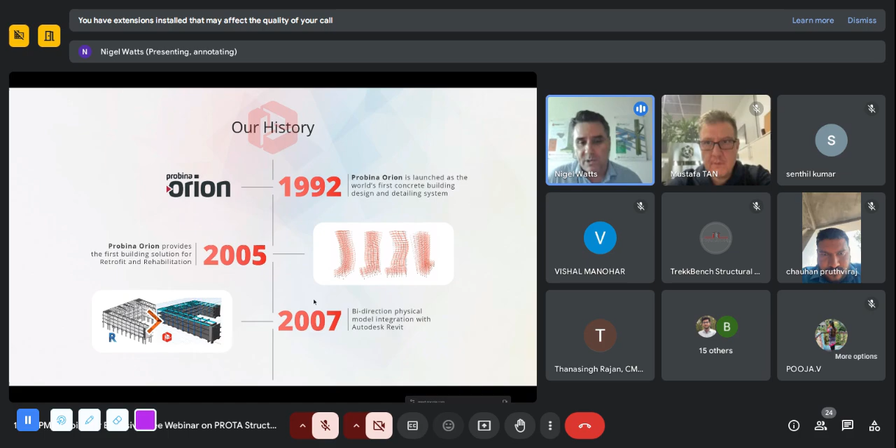We started communicating with Revit, and were one of the first to have true physical bidirectional model exchanges with Revit back in 2007. We've always been trying to innovate and create class-leading technology. In 2014, we introduced ProtaStructure, re-engineering the system to create a true multi-material platform for concrete and steel building design and detailing.

Not to be outdone, Prota's engineering teams have also been involved with some world's firsts. We designed the world's largest airport terminal building in ProtaStructure in 2018 - the new Grand Airport in Istanbul. We're now distributing the software to almost 95 countries around the world, so we're growing very quickly. It's a very exciting time to be with Prota.

We have over 30 years of experience developing the technology. This includes multi-language support, significant numbers of design guides explaining new features - and we've written a lot of design guides to the Indian standards as well. We support a range of international codes: formerly the British standards, the Euro codes, the American standards, and subsets of those - local national annexes for places like Malaysia, Ireland, and Singapore, and places using American codes with subsets, such as Thailand, Indonesia, and the Philippines. More recently, we've also introduced the Indian standards into the software, which is what we're going to focus on in today's presentation.

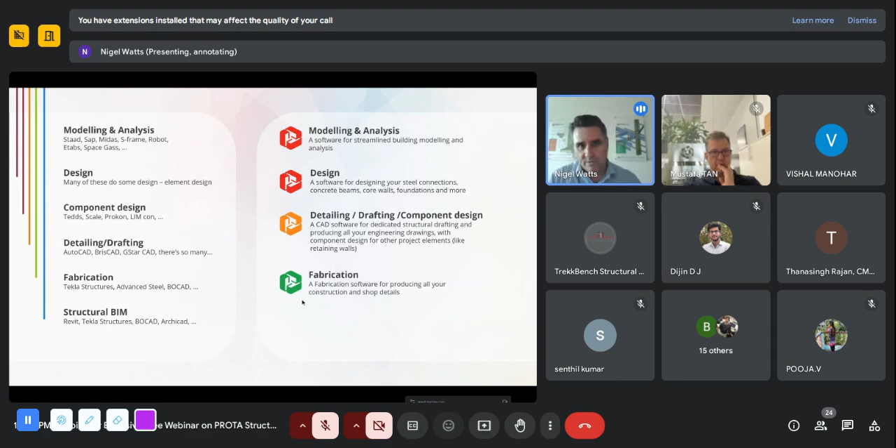You may also wish to go down to fabrication. So maybe you're working on a design build project, or maybe you're working with a contractor and they want that extra level of information to help them facilitate construction. So being able to actually go right down to producing shop detailing, rebar schedules, steelwork detailing, to go right down to the nuts and bolts as required.

And then finally, a tool that allows us to share and communicate with other project team members, whether it's the architect or the owner, to be able to share this information across platforms in a seamless way. So this is the philosophy behind ProtaStructure. It's just one system, streamlined for building design and detailing, and combines a few subcomponents.

So we have ProtaStructure, which is the main modeling, design, analysis, and documentation part of the software. That's complemented with ProtaDetails, which allows us to create all of our reinforced concrete detailing and general arrangement drawings. We have ProtaSteel, which can work with the steelwork and look at the connection design and detailing down to steelwork fabrication. And finally, we have ProtaBIM, which is really a collection of interfaces that allow us to share and communicate the models with other programs out there.

You might want to send a model out to, say, ETABS. Perhaps you want to communicate through Revit and bidirectionally link with Revit. Perhaps you'd like to create all your documentation. So there's a collection of tools in there that allow that to take place.

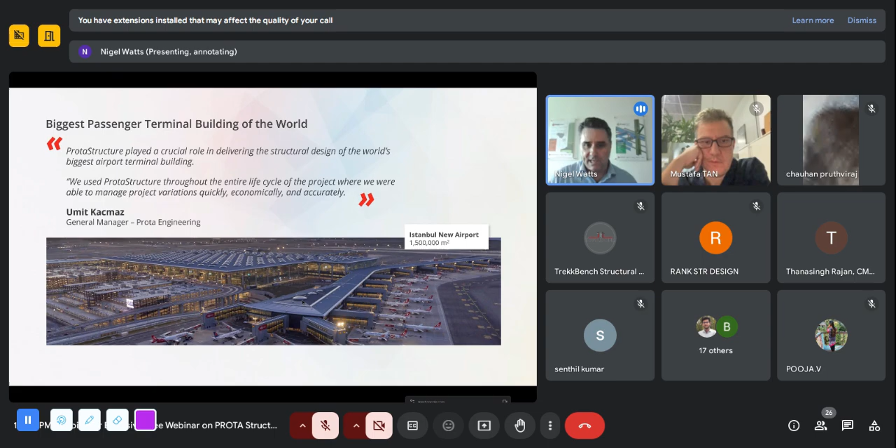Now, the software is being used all over the world. We've got some really amazing projects that we see our clients getting involved with, a range of different interesting projects, from airports to large commercial infrastructural projects, educational, healthcare, multi-story mixed-use developments, hospitals, buildings all over the world, concrete, steelwork. It really is an interesting mix of structures that we see, seismic focused buildings, airport structures, even down into industrial structures, steelwork, stadiums, overpasses and the like.

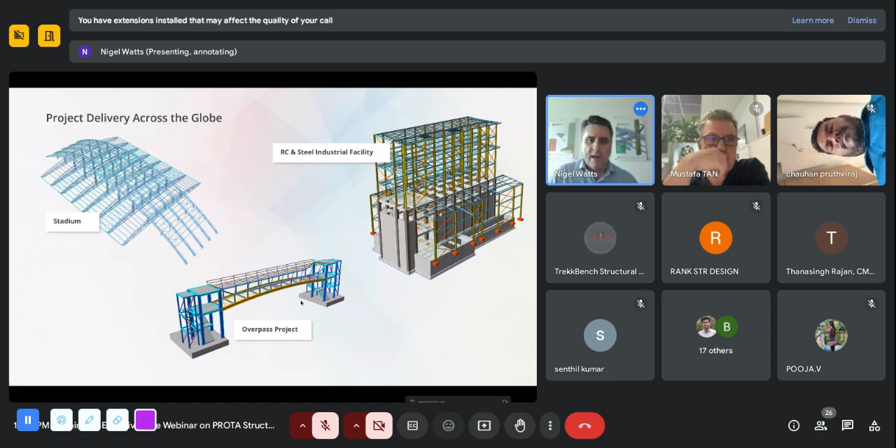The whole system is really driven around productivity. We're trying to streamline processes and make you significantly more productive in the way that you deliver your projects. Time and again, we're seeing across the world that we're able to save engineers significant time in how they go about delivering their projects.

So at this point, I wanted to draw in Mustafa Tan, product manager for ProtaStructure, to talk a little bit about the implementation of the software to the Indian codes. Are you there, Mustafa? Yes, I'm here, it's a great pleasure to speak here today. I hope everyone is okay too. So I'm Mustafa Tan, product manager at ProtaSoftware.

We've done a lot of work over the last year or so implementing the Indian codes. It's quite a comprehensive implementation - we've covered a lot of ground, almost from A to Z. Because of the nature of ProtaStructure, we have a lot to implement, because we are not stopping at analysis or modeling. We have to automate the load combinations, calculate the base shear, and continue with design and detailing - there are a lot of details to the Indian code, so we have to take care of all of them. It was very intensive work, but finally we managed to put all the stuff in ProtaStructure.

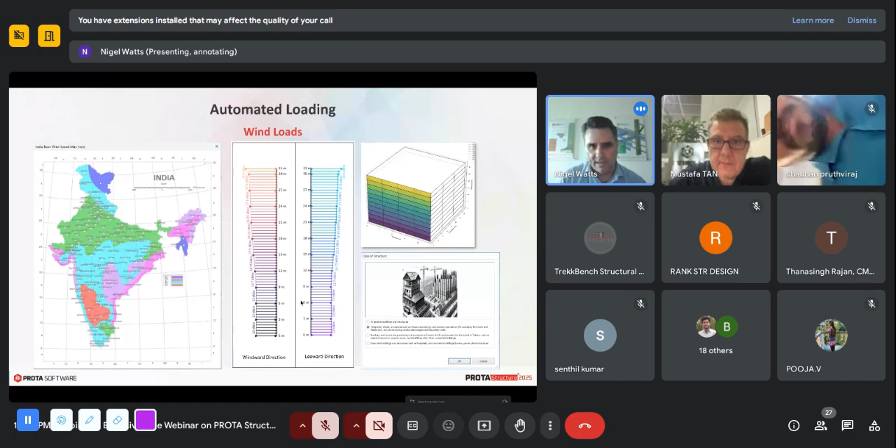Seismic's obviously very important, especially in parts of India. It dominates the design. We've done a lot of work in this area, haven't we? Yes, to admit, seismic analysis and design is one of the strengths of ProtaStructure. We have implemented features that I can say confidently don't exist in any other software. You cannot find the automations that we provide in any other software.

So we have a comprehensive user interface, first of all, for calculating the acceleration spectra. The starting point is the spectrum, and you can automatically create the spectrum using the parameters outlined in IS 1893. For example, all you have to do is select a town in India, the related seismic zone, and other factors will be fetched automatically from the code.

And we provide you the helper tables also that are in the code, and we provide you with relevant references, so you are not lost in the code, and you are able to track what we are doing. Also you can select different structural systems in each orthogonal direction.

You can also select different structural systems in each orthogonal direction, and you can use different behavior factors. And of course, you can use different design spectra in different directions.

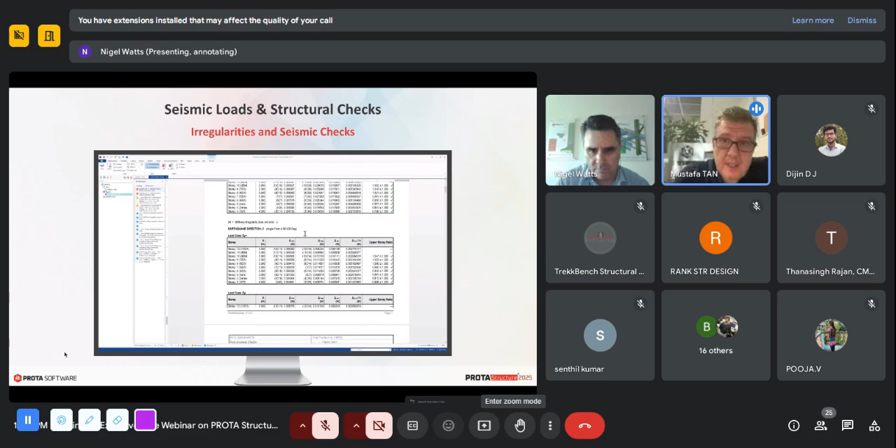So in addition, we also do a lot of underlying checks. Post-analysis checks, there's lots of checks that we're performing, isn't that right? Yeah, you're right, because seismic analysis is not complete unless you perform irregularity checks and other seismic checks. These are very important. You cannot just stop at calculating the base shear. The post-analysis report you see here includes all the important checks related to IS 1893, again with code clause references.

For example, we perform a drift-based story check. We perform vertical mass distribution checks, torsional irregularity checks, and once we detect a torsional irregularity, for example, we automatically repeat the analysis and apply the penalties. We also check whether the equivalent static method is applicable or not in the project.

Yep, and as you say, because it's an iterative process, a lot of the penalties are automatically applied, right? So that just takes a lot of the pain away from having to do that manually, isn't it? Yes, in a typical software, once you calculate the base shear, you have to do all the irregularity checks by yourself, and these can be really rigorous and time-consuming.

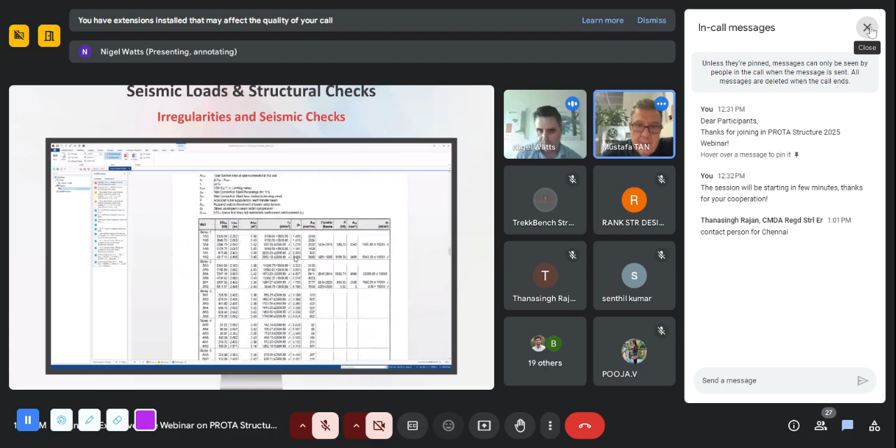I can say that. Also, there are some details about the base shear calculation and the modeling approach you use when calculating the base shear. For example, diaphragms, rigid diaphragms or flexible diaphragms, how you distribute mass. So there are details also on top of that. And this all comes together not just in terms of the analysis, but also the design, right?

After we do the building checks, we go member by member and design the reinforcements, for example, for the beams under the envelope actions of all seismic loads. But again, seismic design will not allow us to use the analysis results directly.

For example, if you are designing a ductile beam, you have to use the capacity shear, and all the minimum ratios, maximum ratios, or constructive rules are changing, overridden by the seismic codes. You cannot just go with the design code.

You have to comply with the seismic code. So all the design rules outlined in the Indian seismic code are applied for the beams, also for the columns, as we'll see in the next slides. Obviously parts of India may be low seismic zones, and you may not be designing for ductile detailing, or maybe it's just typical elastic gravity-based design.

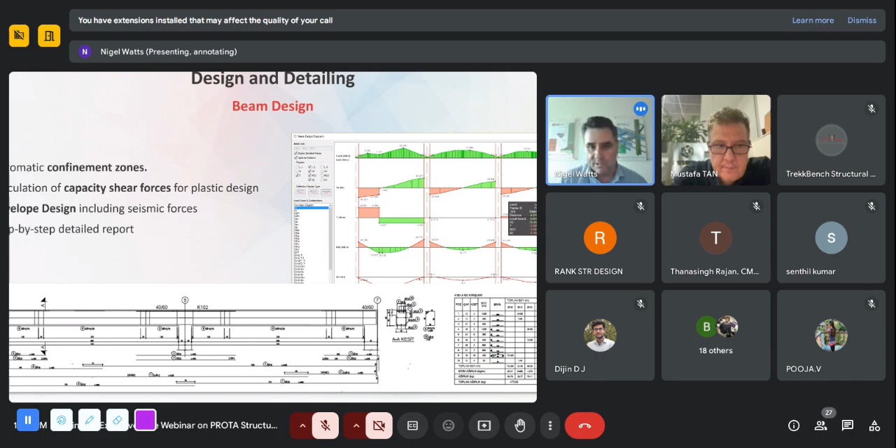So that's no problem at all. But what we're doing here with seismic goes above and beyond what you would do for typical gravity-based structures. And this also complies with the reporting, right? You can see this not just with the design, but right through into the detailed reports. Yes, because transparency and transparent design documentation is priority number one for us.

We have been investing in it for a very long time, spending a lot of time on it. So when you design a member in ProtaStructure, it can be a seismic design or a gravity design. When you get the design report, you will have all the step-by-step calculations with code references and clauses outlined, so you will be able to verify, double check, or track the calculations in ProtaStructure with confidence.

And this is not just for the beams, but also the columns. Obviously, columns and walls are important elements, and they're treated in a very rigorous way, aren't they? Yes. First of all, for the columns, we perform a biaxial design.

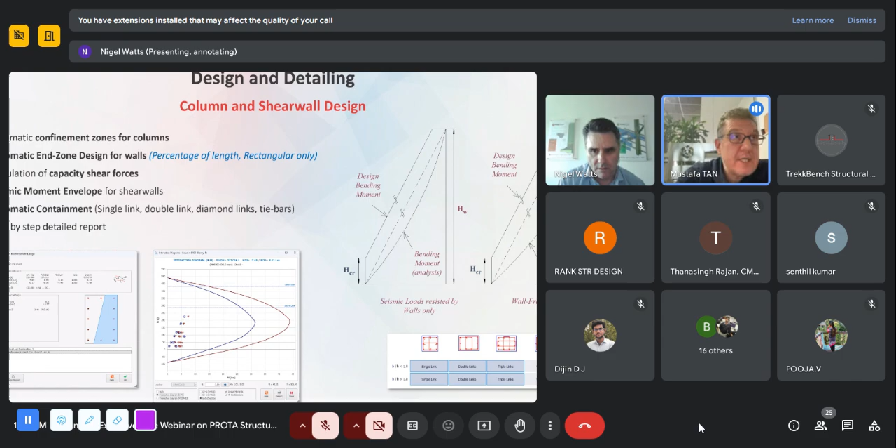Whether it is a seismic design or not, it doesn't matter, we perform a biaxial design. But when it comes to ductile design, what we do is apply the reinforcement ratios and constructive rules for the columns that are outlined in the seismic code.

For the walls especially, we have to consider the end zones. These are automatically considered in ProtaStructure, and also the confinement plastic zones - each code has different terminology for it, you can call it confinement zone, plastic hinge zone, or protected zone for columns and for beams. These are all calculated automatically, and the amount of links are provided accordingly.

And for the walls, especially within the critical height or outside the critical height, we can adjust the end zone lengths, and we can calculate the shear force or bending moment envelope for the ductile wall design.

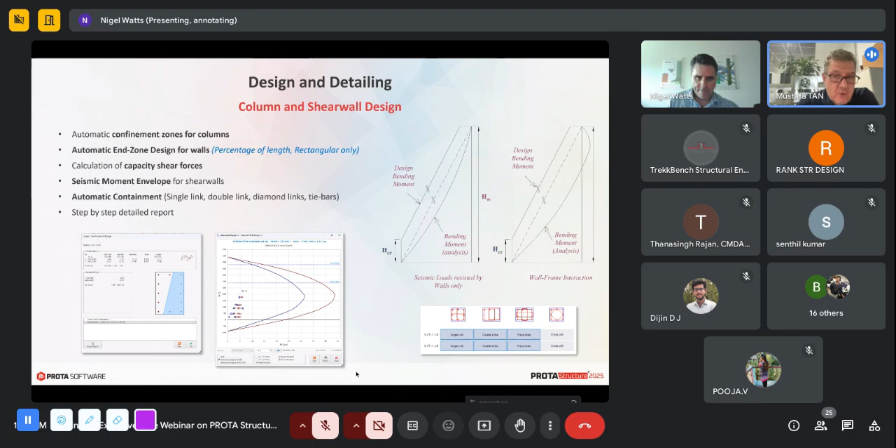And also one important thing, the section design of columns. For the section design, you have to provide proper confinement of the concrete core. So you can use a single link with tie bars, or you can use double links, diamond links, triple links, depending on the confinement requirements. These are all automated in the software.

Obviously, the documentation is key around this as well, and there's detailed documentation covering the seismic requirements also. Yes, especially the shear design needs some elaboration in the reports, because as I said, we have capacity shears calculated, contribution from concrete under specific conditions, and so on. There are some details on that, and we put that in the report step by step also.

So as I mentioned, the reporting is important, and we've provided detailed step-by-step calculations. That applies for the majority of the design, doesn't it? So it's not just the concrete work, it's also the steel work and other parts of the system. Yes, because we support IS 800, the Indian steel code.

So you can, of course, design the steel members, and at the end of the design, we provide step-by-step detailed reports. The step-by-step reports are the de facto standard in ProtaStructure. For each member, you get a detailed report.

Of course, you don't need to print all these out, right? These can be summarized - there are summary reports, and you can selectively choose if you want to provide comprehensive documentation for some critical members. Yeah, of course, it can be thousands of pages if you attempt to print out all the detailed reports, so for that purpose, we also provide summary reports.

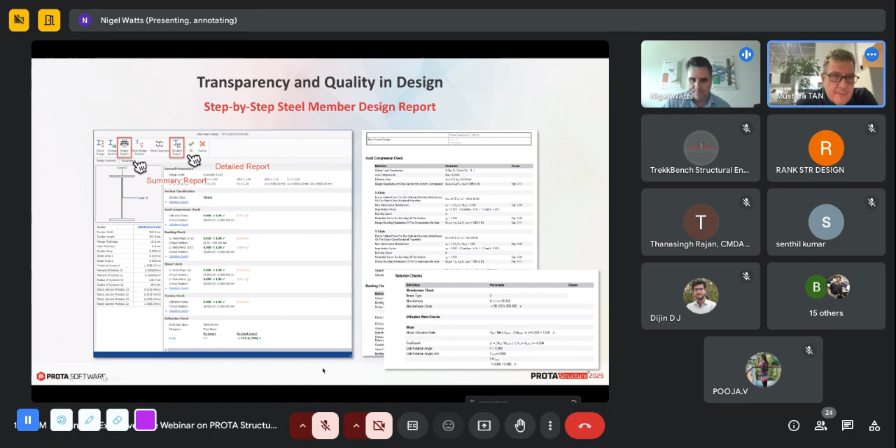We've been expanding the capability of ProtaStructure, and so we now have a composite design. Just for the Indian users, we're aware that you do design this to Eurocode, and this is going to be available in the next update. You'll be able to select a composite design as well. This is just one of those aspects where we're continually expanding the scope of the design systems that we are incorporating into ProtaStructure.

Yes, in fact, the composite design in ProtaStructure is quite powerful. I don't want to start talking about it in detail because it will take an hour maybe, because there are a lot of details like composite action or stud calculation, whether it is uniform or segmented layout, vibration checks, etc. So there are a lot of details in it, but you can benefit from the composite design in ProtaStructure, of course.

And the key, I think the real key with what we do is we automate the drawing production. It's all about streamlining design and detailing processes, and this carries through to the Indian standards as well.

Yes, especially in ProtaDetails, with one click, you can create all the structural details. Once you finish your design in ProtaStructure, you can just create all the details with one click in ProtaDetails.

And that detail drawing includes all the seismic provisions. So, for example, lap splices in the middle or at the supports for the columns. All the plastic hinge zones are confined with links, and span regions are maybe confined with different link spacing.

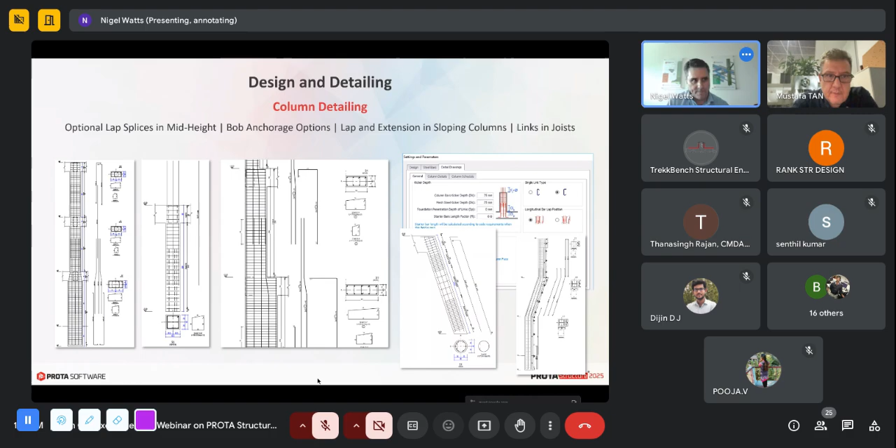Definitely. So that extends all throughout, right, even down to core wall detailing. And there's different options for this as well.

Yes, shear walls are especially important because they help us reduce the lateral displacements, and they provide strength to the structure, of course. But if you do not detail them correctly, you can have serious damages in the building. And for that purpose, especially in Turkey, we experienced a lot of damages for the walls that are not detailed properly.

So for that purpose, we have comprehensive options for how the web bars will go into the end zones, how the links in the end zones will be detailed, and how the boundary elements or the end zones will be detailed, what will be the lengths, etc. So we have put all that know-how and all that experience in ProtaStructure.

So again, with one click, you will get all the seismic details of shear walls there. It can be a narrowing wall, it can be a basement wall at the bottom and an earthquake wall through the top stories. It doesn't matter, you will have the details.

And there's some real smart tools now in terms of driving the detailing process, especially with things like automated containment. Yes, rectangular walls we do, and also core walls are an important part of, especially the high-rise structures. So core walls are no exception to seismic detailing, so you have to detail them also against seismic forces.

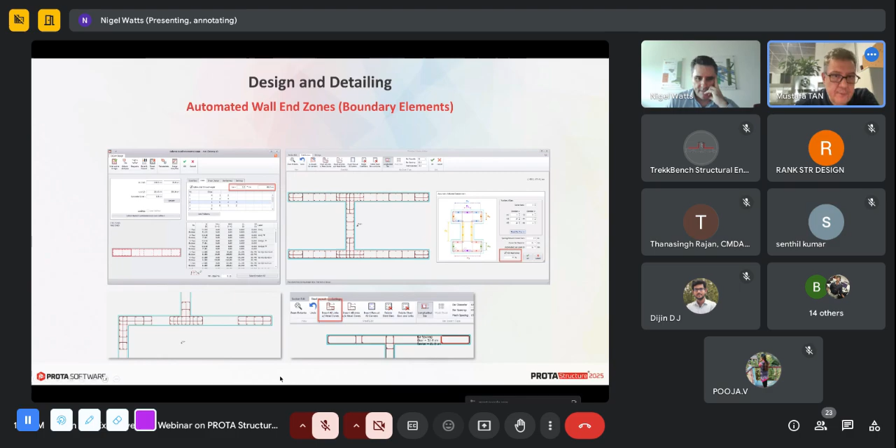And also we have an interactive wall editor that you can use to, for example, put the bars automatically with end zones and web bars, and you can even fine-tune the reinforcement. You can insert additional links, additional tie bars, you can change the diameters and make it ready for the design check and detailing. Yeah, it's very customizable, it's a great new feature that's been introduced recently.

Obviously the seismic design process is a theme here today. In the north of India, this is something you need to look at carefully. Other parts of India, perhaps not so much, but there are a lot of details behind the checks we do. Things like strong column and joint shear checks are important, and they're automated, especially these two checks if you are designing a ductile building.

These two checks have to be done after the design, once you know the reinforcement inside the column and inside the beam. They have the potential to roll you back to square one, because if they are not satisfied, you may need to change your reinforcement, change your design, change your sections, or even change your structural system. So they are very important and very hard to do by hand.

So these are all automated. You can check it during the design or after the design, and ProtaStructure will give you warnings at every step of the way, so you can fine tune your projects by looking at these checks.

It's not just RC, there are other capabilities in the software we're simply not going to get to today. The BIM integration we have is very powerful, and we're able to interface with a wide range of different systems, because our philosophy while developing the software is to always think BIM first. We always try to think whether what we do is compatible with BIM practices and BIM data structures.

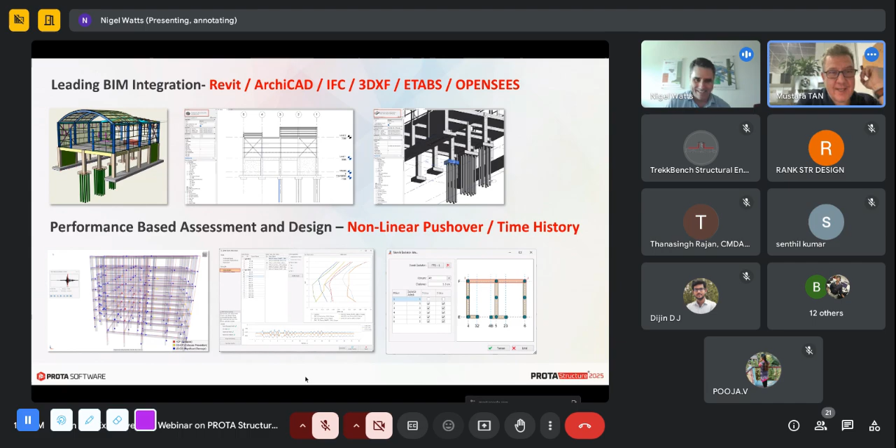This would take maybe two hours to talk about, but in a nutshell we have all these features. And then it extends into steel design and detailing, right down to foundations. Foundations, of course, is an important part in ProtaStructure. We do pad footing, pile caps, raft foundations with finite elements or analytical methods.

We also send the model to ProtaSteel. Once we finish the design in ProtaStructure, we communicate the model to ProtaSteel with internal forces and all the physical properties, then we can do component and connection design in ProtaSteel. We have a very powerful tool, IntelliConnect, to design connections with a single click - hundreds of connections in a very automated and smart way. Connection design is an important part in ProtaStructure as well.

We're just really touching on it a little bit. We can't really do the system justice in the short time we have today to speak to everybody. But that was really great, Mustafa, thanks very much for giving us that insight. The pleasure is mine, thank you so much for giving me the chance.

So thanks very much, Mustafa. Look, we're going to - I'm now at this point just going to come out of our presentation, and I'm going to actually move into the software. So if you just give me a minute, I'll just minimize my screen here.

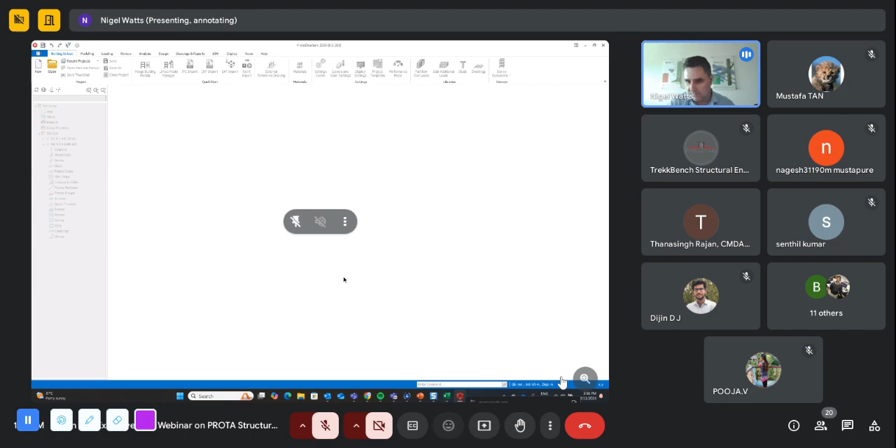I'm just going to do a quick demonstration of the software and show you how what we've just discussed comes together. So I'm going to create a new project, and we can call this India 2025. Here you can choose the templates that Mustafa was talking about earlier. If you were doing projects outside of India, you can draw upon other templates, but here I'm going to choose the Indian template. When we select this, it will load the Indian codes of practice, so all the localized design and detailing preferences will be loaded into a template, and it will set this up for us to start the modeling process.

There are different ways this can work depending on the information you have. Mustafa was talking about the fact that you can import information into here. A common way of working is that people maybe just have a 2D architectural plan. You can import this into the plan view and use it as a ghost layer to model on top of. You can extrude or extract grid lines, columns, and walls from those drawings if they have that relevant information, and build the models quickly.

The general environment here, you'll see across the left there's a tree, and along the top we've got it in a very simple ribbon format. So starting the project is here. You can then create your modeling, your loading, assign your wind and seismic load. You can create your modeling with steel and concrete, then assign loads, whether it's seismic or wind loading. You can check things before you get into the analysis and then the design. Finally, you can produce or create all your drawings, whether it's concrete detailing or steelwork detailing with ProtaDetails and Proto Steel. And if you wish to communicate with other platforms, you can. We've laid this out logically so it's easy to understand how this is all set out.

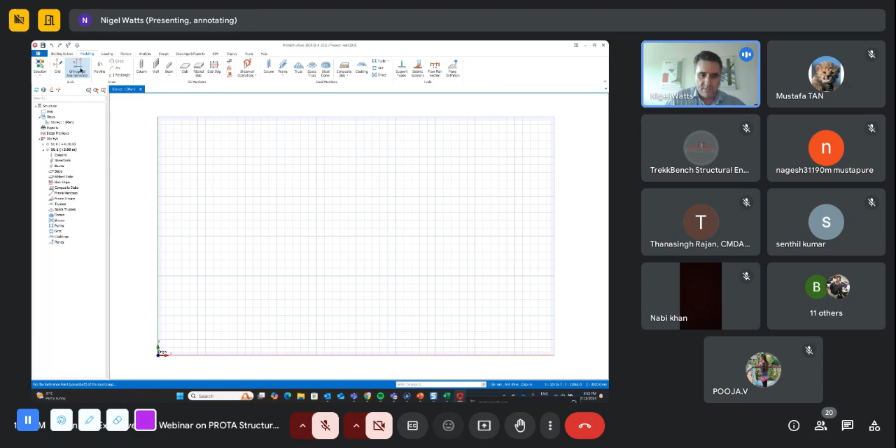What I'm going to do today is just create a simple model, and I'm going to build it from scratch because I want to show you the essence of how the system works and how efficient and quick it can be to create a model.

Here I'm just keying in some grid lines. Everything I'm doing in here is live, so you're seeing it in real time. I've created a grid line arrangement here. These are dynamic, so you can work with the axes and make changes.

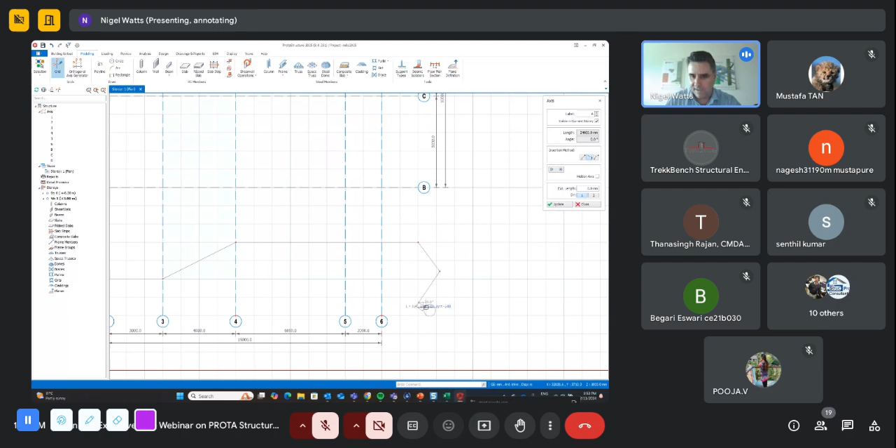If you want to perhaps put in a grid line that's not exactly straight, maybe you've got a curved facade of the building, you could define this. You can type in a chord length to set this out. If you have grid lines which are a little bit irregular, and we often see unusual buildings or facades that some of our clients are working on, you can just come in and use the grid lines to help drive the set out. This can be whatever funny arrangement the architect may have dreamed up. So you can create your grid lines here to set out the basic structure.

Now I'm going to work with physical objects to create the model. The first thing I'm going to do is create some columns. I can create a column by clicking and inserting it, or if I have multiple columns, I can box around to create them. The columns can be orientated in different directions and different ways.

If I would like to place a load of columns along the curvature of that grid - let me just do that again, I've gone wrong. If I want to create the columns along the curvature of the grid, let me just do this again. I just missed clicking the axes there too, so I can come in and create that, and you can see that they've all been set out along that curve.

Now we have libraries of standard objects within ProtaStructure, whether you're working with concrete or steel elements. This covers all the different steel sections in the Indian code, typical steel sections, built-up sections, cold form sections, as well as composite sections where steel is encased in concrete. You can just choose from the library here of the section you want to work with.

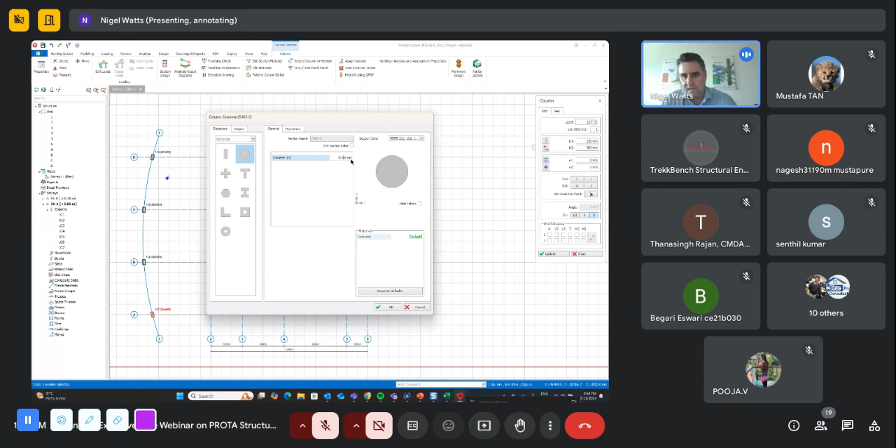I'm going to create say a 500 diameter circular column. The engineering properties will be automatically calculated, and we can use this in the model. So I can come in and define that column, grab that property, and create another column here, and set that up. So we might have a few columns as I've indicated.

You can also use things like grid lines to help with sketching items in the model. So if I wanted to use these to help define maybe the lip on a core wall, for example, I could come in and use these kind of sketch lines to help with that.

I may want to now create a wall, so I'm going to put in a wall here. It's looking at the dimensions, so it's asking you, with the Indian code, is that too short? Did you actually want a wall there? There's a reason why I've done this, which I'll get to in a minute. But let's just come and create this wall.

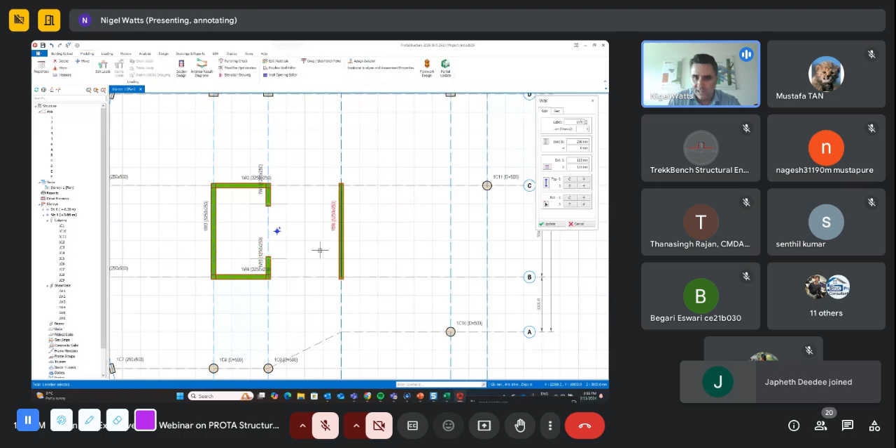I'm going to put another wall in here. I'm then going to come and create some beams.

I can feed in the properties of the beam that I want to work with, and then to create the beam I can box around to put these in, like I am doing here, or I can just snap to point to put the beams in. It knows there's two spans, it's automatically created that. It's cranked that beam along the grid line, or I can just go directly.

As I'm going, if I wanted to create, say, a curved member, I can just come and create this very quickly. If you have lots of members in an area, so if I wanted to create multiple beams in this area here, it will create those. I can just box around to set those out.

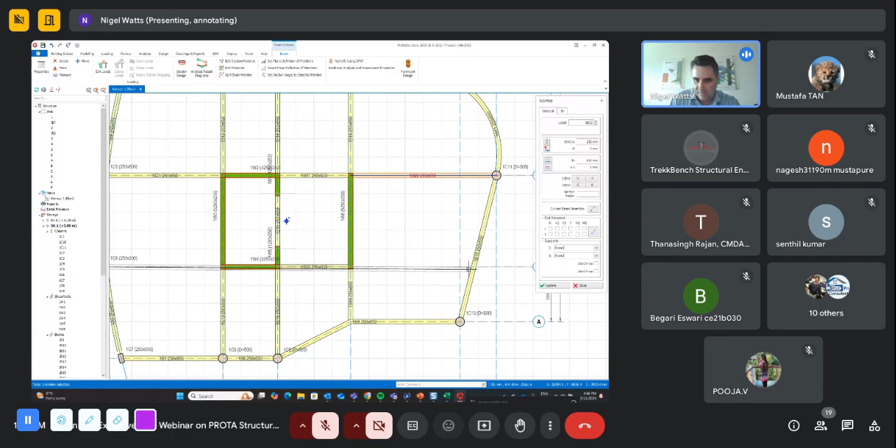It understands that this wall and this beam already exist. So if I wanted to create an extra couple of beams there, I can just draw them through. I don't have to worry about overlapping. All these types of things are just taken care of by the software because we're working with a physical model.

Secondary beams, you can snap to handy points, quarter point, third point, mid-span, and you can just come and create these quickly, driving them in this way. If you have a particular distance, while mousing over, you can hit F2 and type the exact distance in, and it'll pick that point up. It also picks up handy points like the perpendicular, and then you can create that member there.

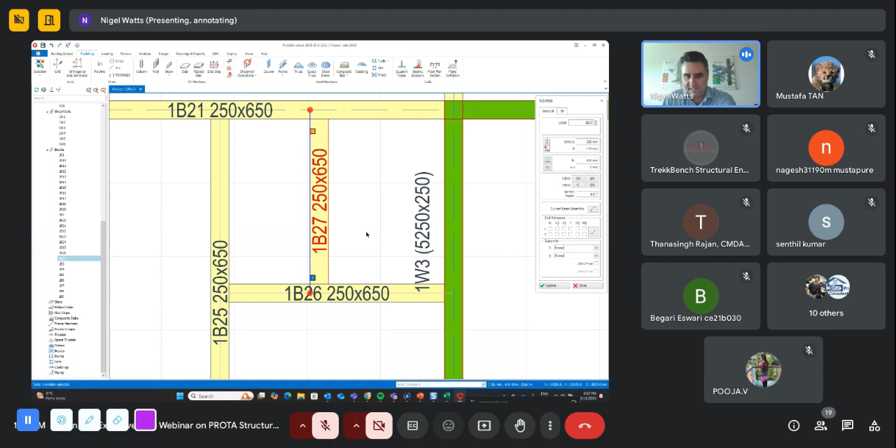Now you can move these around. I can just turn that message off. I can adjust these to suit the architecture, so if you didn't quite get the positioning right, you can just adapt that to suit. Hopefully here you're starting to see that this is starting to look a bit like a key plan, and this is all intentional. You can see the labeling and so on has been done, and that's flexible - you can change this if you wish.

At this point in time, I'm going to create the slabs, but as part of this process, it's going to ask me to generate the combinations. So this is what we were talking about earlier, where we can set up our vertical load combinations, and this includes my dead and live load cases together with pattern load variations.

We can look at stage construction analysis. You can assign thermal loads here. You can also generate lateral cases, so I'm going to use response spectra. You could include vertical seismic if you wish, or you can turn this off - it's entirely up to you.

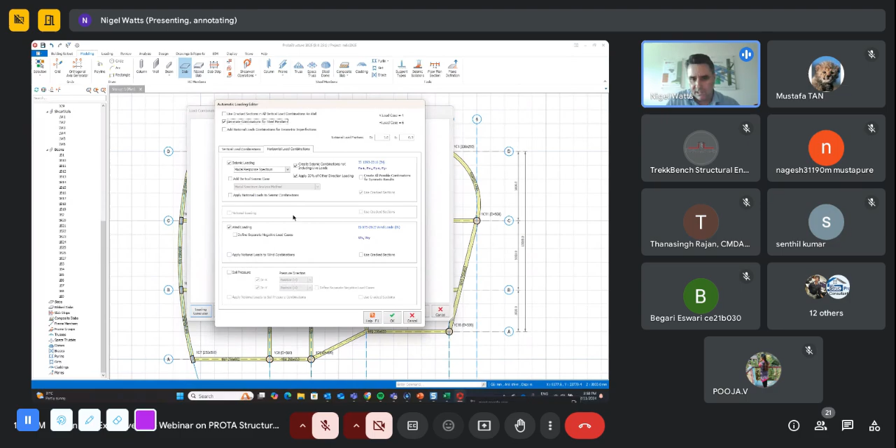You can also create wind combinations automatically in accordance with the code. If you wanted to set up soil pressure and the like, you can do this. You can generate separate combinations for steel, and these can be automatically created here, along with other permutations you can set up in the software. So if I hit OK, with one click it will automatically generate all these combinations, and you can see them here for the steel and the concrete.

You can manipulate the combinations, so if you want to take combinations out or reduce or remove combinations, you can do that as well. So if I hit OK, that's set up.

Then I can come in and create the slab, so I can key the thickness in there. You can assign dead and live loads into this, and I can just update that. So you can see here that we've created that, and I can just run around, maybe I've got those loadings here and here, and maybe over in here and here, maybe it's a bedroom or something like that. These ones you can manipulate, so you can type whatever load you like, and you can also have libraries of finishes that you can draw the loading from.

You can vary the live load, type it in, and just come around the building and create. Hopefully what you see as I'm doing this is that we are automating things like the distribution of the loading, so you can see the live load and the yield lines being created as I go. You can manipulate this to suit, and I can just run around and adapt this accordingly. Maybe this is one, for example. You'll see here that we've automatically worked out the yield line, and you can distribute in this manner.

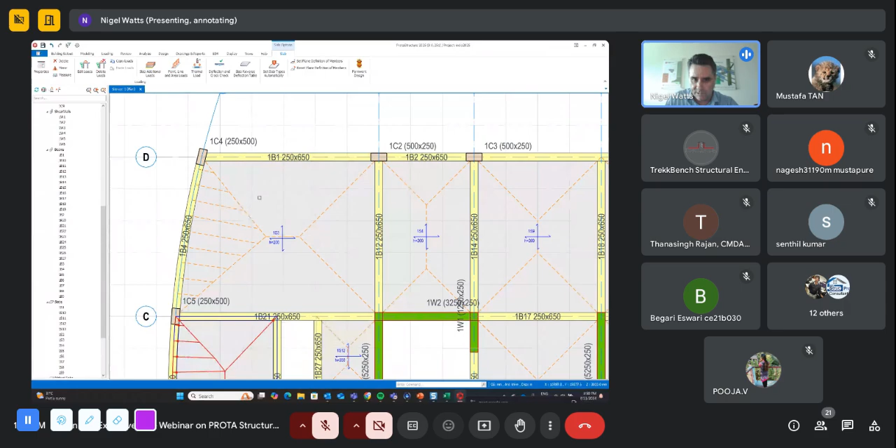You can also use finite element to distribute loads to members. So if I just click on this member, you can see that even at this point, instantly we've already distributed the load to the frame member. And this is very, very efficient. It's very economical, and this is driving efficiency in the building.

Now I may want to add extra loads to this. You can have libraries of things like brick walls, and you can set these up. So I could have maybe a 140 block wall. I want to key the height of this wall in, and then I can just click on this and assign that to the member, and that's just set up. So straight away that brick wall's been created, and we can see that on the member there.

Now any of these loads, you can take them and copy. So I can copy the brick wall loading there, for example, and choose other members that I would like to copy that to. So we can copy this, and I can choose - you can select members, like I'm doing here, you can run around and just select, or you can box around to choose members, and then you can just copy and paste. So it's just an easy process here.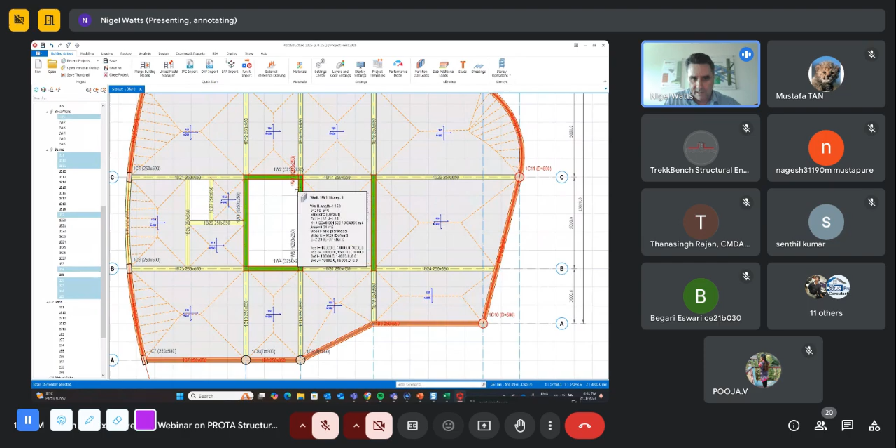Now we were talking earlier about core walls and so on. You'll notice at this point that I've actually created these walls here, and when I originally set them up, I set them up as individual panels. But what I want to do is just select these walls, and I'll just grab that last one there as well, and I'm going to actually take this wall and merge it. So this is now one singular core wall.

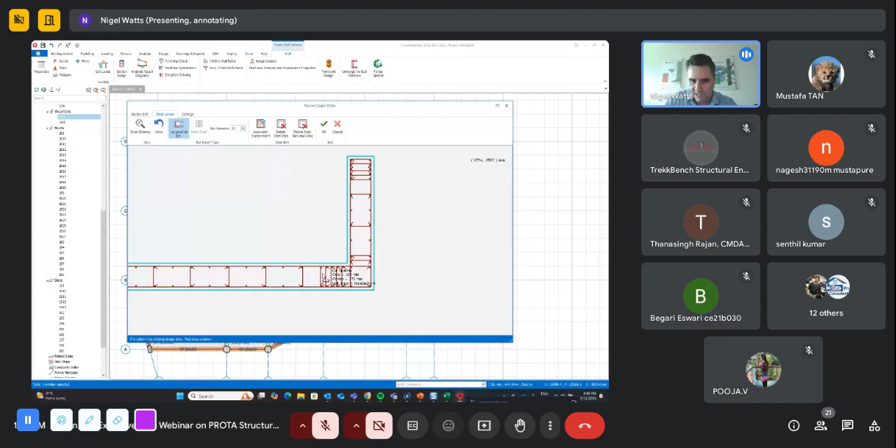Mustafa was talking earlier about us having capabilities to be able to do some smart things like automate the reinforcement of these walls. So I'm going to do that. I'm going to add in - you can choose the percentage of end zones that you want - and then with a click of the button we can prescribe an arrangement here. Now this isn't final, during the design process we will refine this and select the bars, but with things like reinforcement around the corners, creating the end zones here, this whole process is being automated as part of how we've established this. So if I'm happy with this, I can accept that, and then that gets set up in the model there.

I've been working in 2D at this point, but what we've actually been doing is creating a 3D physical model. You can see the 3D model here, it's a physical model, and I can work with this and manipulate it. So you can look at different views, you can tile these in the model, and you can continue to work in both 2D and 3D.

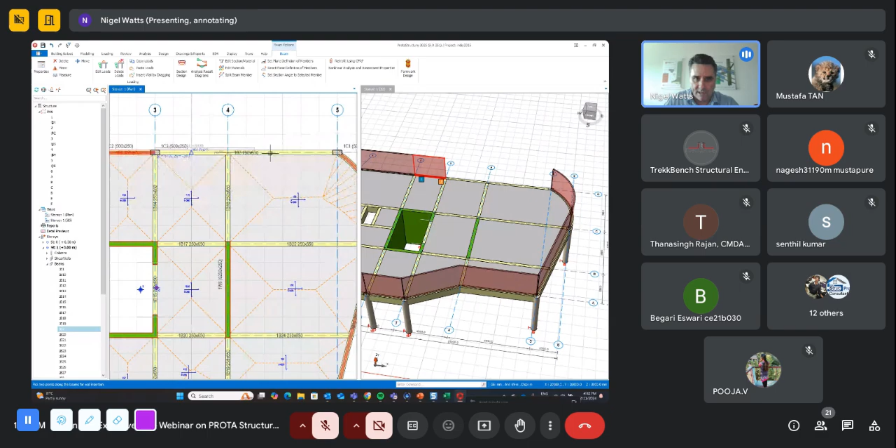An example might be that I want to continue to load the model. Maybe I'd like to put a loading along the wall to this point. I've just clicked and dragged and created that loading. Whatever you create in here, you can visualize.

So as I'm going, maybe I'd like to do other things. Perhaps I want to add in an opening in the slab, or perhaps I want to create a set down in the slab. So I can come in and set these up, and I can work with our physical model here to define these. So if I had a drop in the slab, you can see that physically I've created that opening, I've created that drop.

If I got the position wrong, the beauty of having a physical model is I can just pick this up and reposition it to suit. So if I had to make a change, the M&E engineers told me that's not quite in the right position, I can do that.

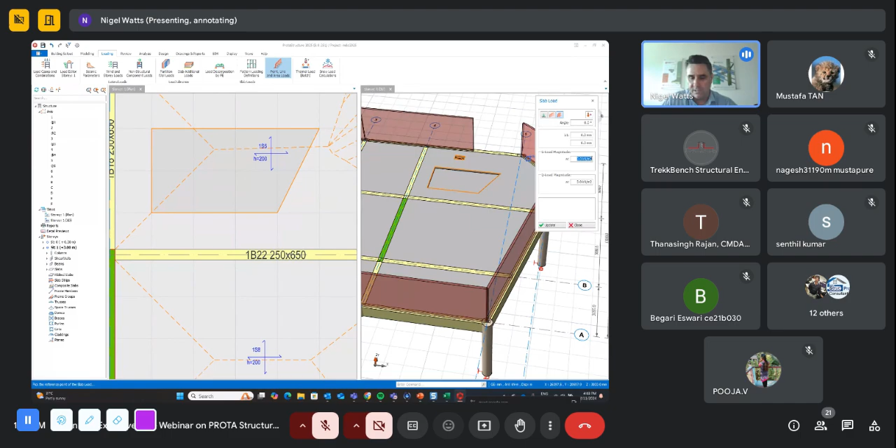You can do other things like add other loading to the model. So perhaps I'd like to create a plinth and assign that load to the model here. I can easily come in and create that, and whatever you create here physically, you can see it in the model. Now I may want to select this wall.

You may also want to introduce things like openings in the wall. Perhaps you've got a window or a door in that shear wall that you'd like to create. So it's very flexible, and the idea is that we can just create whatever it is that you'd like to see in the model here.

Now I'm going to come in and insert some floors, and I'd like to make this building, say, 5 stories high. Then I can take this floor that we've created and start to generate information up. So I can copy that and replicate it up the building. You can see very quickly I've generated up and created those additional floors there.

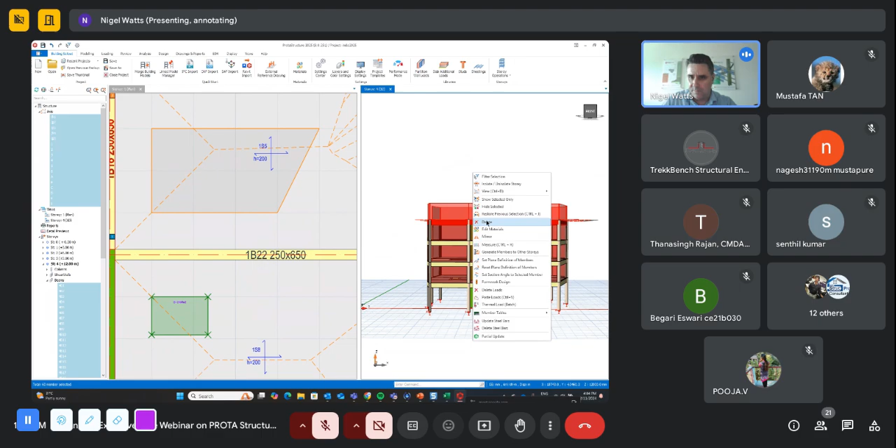Now the model is editable. You can make changes at any point. So if you wanted to remove elements in here, you can. If you wanted to change the structural system, for example, maybe at the top here I want to delete, and it might be that I want to remove the beams. I could just with one click take those away, and then I'm left with a flat slab at the roof level. So it's very easy to adapt the model to suit what it is that we would like to show.

Now I could continue to work with that a little bit. So if I decided that maybe I don't want this wall here, and instead I'd like to create a couple of columns, I could just come and set those up and create those. I could select the columns there. Let me just come and grab them, and we could make changes to this.

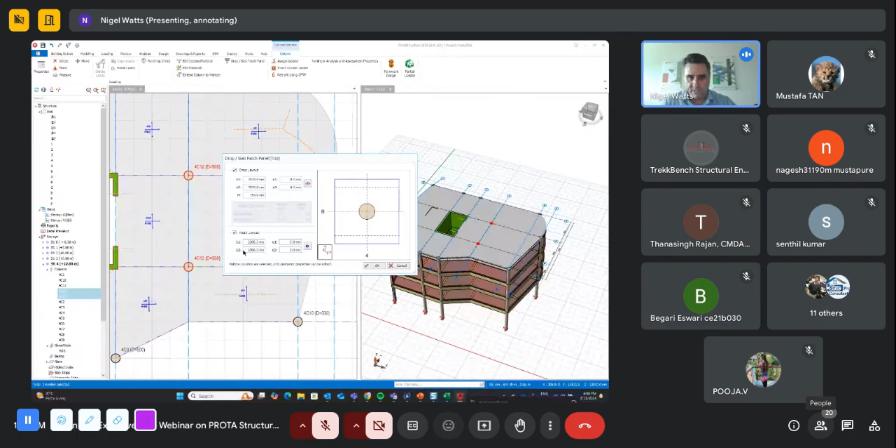We could, if we wished, introduce maybe some drop head panels. This may be a flat slab, and we want to have some drop head panels to help us with the shear. You can play with the extent of these panels. You can also set up patches that we can use to integrate across those panels for design. All of this can be easily done in the software, and we can just hit OK and they're set up. So physically here you can see that I've changed that model from a conventional beam slab to having a flat slab at that top and at a higher level.

Now to design this, ultimately we will cut strips, and we can do that here to help us with the design. I'm going to cut some strips, some finite element strips. I'm going to use the building analysis results, and cut some integral strips across the slab. So I can cut those strips through here, and then later we will collect the forces along those strips for the design and detailing of that slab.

So you can define your strips here, and I won't do the whole slab, I'll just do a couple of places just to suit. I'm just trying to give you a little bit of variety here so you can understand the various capabilities that we have. So I've just come and set that up, and later on we'll integrate along these strips, pull those out, and design and detail the reinforcement. So that just gives you an idea about that level.

Now I'm going to move up to the roof, and I'll just change the view so you can see a clearer view of the structure here. And I'm going to work with some steel work now. So I'm just going to create some columns.

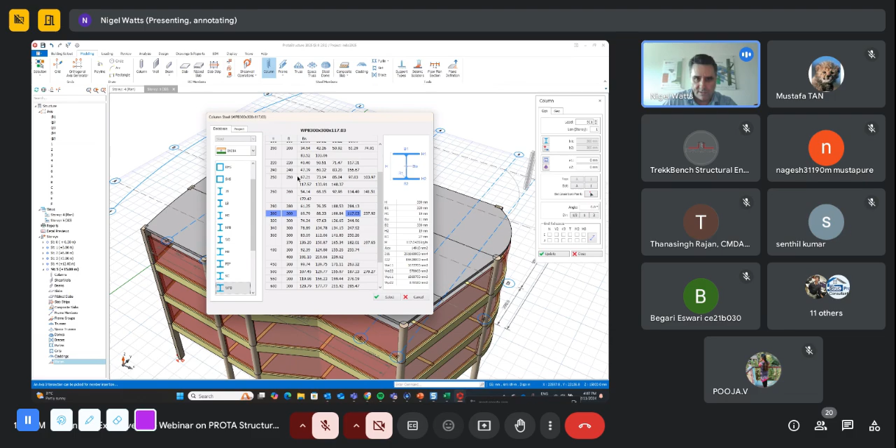So you can choose from libraries here of different sections. You may have something in mind that you would like to use. Okay, maybe I'm using a 300, something like this section here. We can just grab a section from the Indian database, and we can create some columns in here.

So you can click and position these in accordance with the model, and I can drag. Let me just get the position right there. We can create those additional columns there. I've just set those up like this.

We also work with what we call contextual modeling. So if I wanted to create maybe a truss, I can just drag between two points, and it will preview different types of trusses that we may have. I can import from CAD, and I can also define it a little bit like STAAD, where you can put nodes and so on in. We have libraries here of standard truss arrangements that you can preview and see.

You can manipulate these, play with the number of bays, and underlying this, we can play with the splice positions. You can edit the members and the sizes and so on. You also have full control over all the member fixities here. So if I want to introduce releases, maybe moment releases or axial releases to the steelwork, all of this is very flexible. You can set this up, accept it, and then the element gets created.

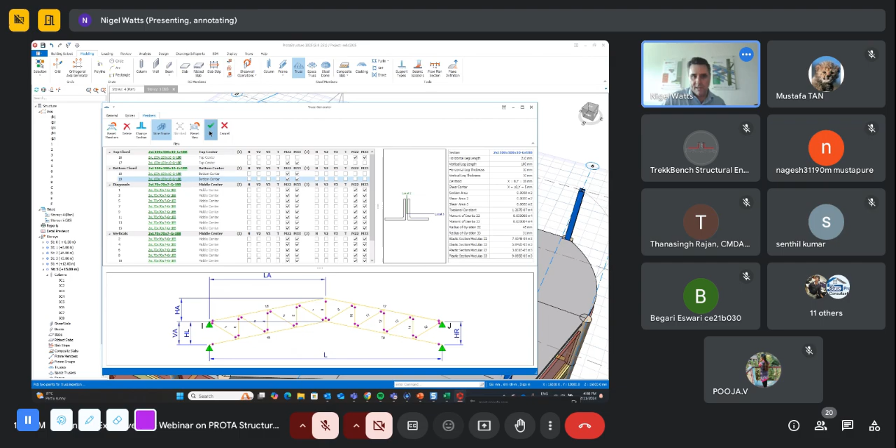Now I can take this element, copy it, choose set out points, and replicate that across the model. You can choose other elements that you may want to copy that to. So we can just choose a set out point, and then place that across those frames. Very quickly you can define the steelwork structure there.

I'm going to work with some steel beams here as well. Again, you can choose a section, and play with the fixities of the steelwork. When you model the steel beams, I don't have to worry about just modeling one by one, since it knows those columns are there. It's asking me if I want to split them, and I can do that.

Once I've got these in, maybe I want to replicate these elsewhere. So again, I can use the copy command and easily copy and paste these elements to other parts of the structure. I can easily come and define these.

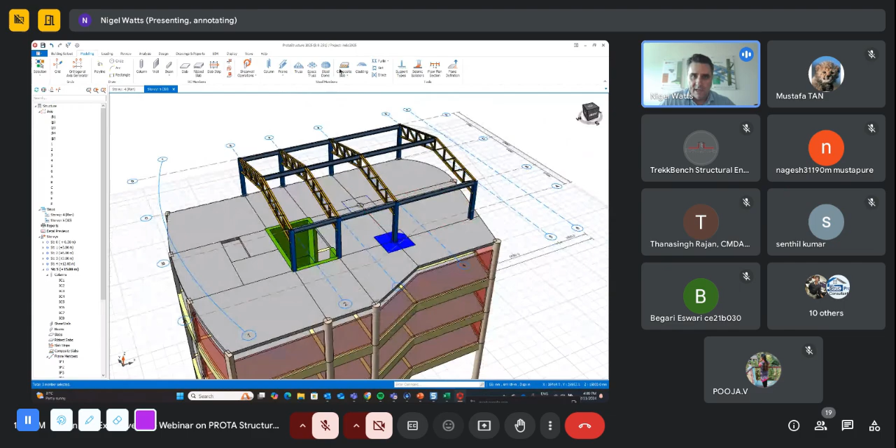Maybe you'd like to also set up and create things like braces. Again, you don't have to key these in. You can just choose the two elements that you'd like to provide braces for. So I can just choose those two columns there, and it will preview a bracing arrangement for me.

You can have different types of braces, V braces and K braces and diagonals and the like. You can choose your preference here, and again play with the section size. Maybe you'd like to have a tubular section that you'd like to use. You can just define this, and if you're happy with that, you can accept it, and then the brace will get created.

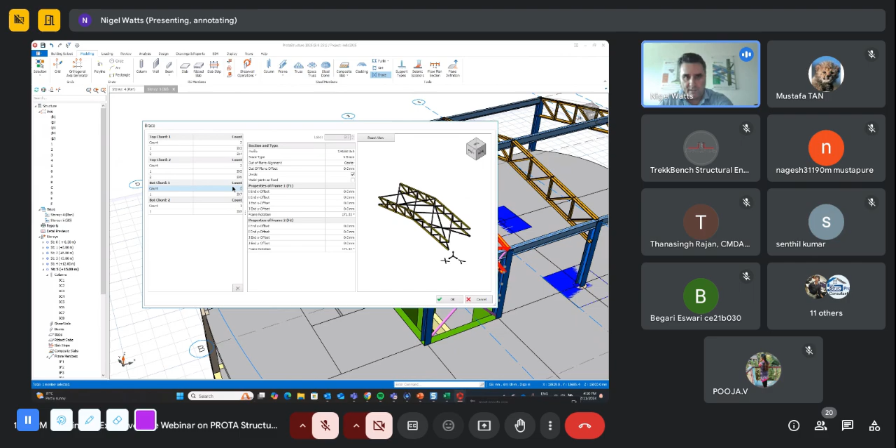Now you can run around and brace other parts of the structure, maybe that other bay there, or maybe I'd like to brace the roof. Again, it will preview bracing arrangements. These can be manipulated: you can key the number of braces in, toggle and play with the physical offsets, and if you're happy with this, then you can accept that, and those get created.

So the idea behind this is we want to be able to create these elements very quickly and streamline the process. Similarly with purlins, if I wanted to create some purlins in this roof, I could come in and choose an arrangement. You can see that we're also modeling the sag rods, and these can be manipulated as well. You can choose the number of bays and so on that you want to create there. These can all be manipulated to sections and so on, and if you're happy with this, then you can create.

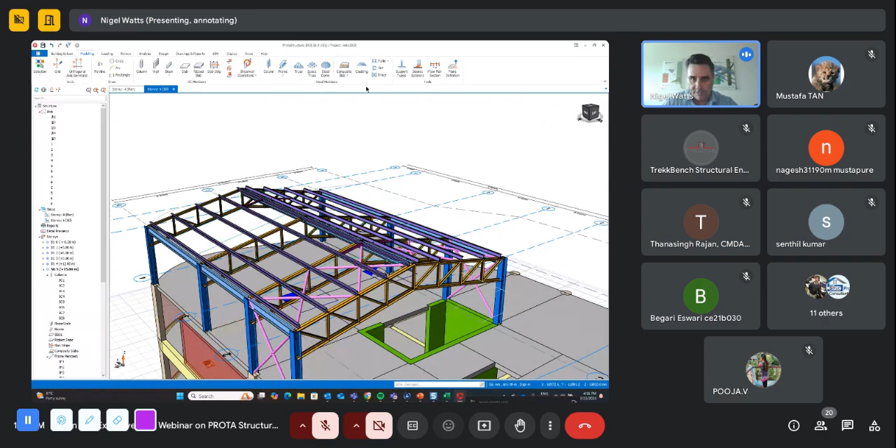Final thing I'll set up here is let's create some girts. So I can choose to define girts here. We can just choose those two end columns, and again it will preview an arrangement for the girts. We can play with the spacing and the section sizes, preview it, make sure that you're happy with how that's set out, and then you can create. I can also choose to create that across the other face here.

Okay, so let's choose these two columns, and that will be set up. Very quickly you can see that we've created this model. The important thing about what we've done is that this is a physical model, and the way we've set this out would be how you'd go about building it. The purlins sit on top of the truss, the girts are on the face of the column. It's a proper physical model.

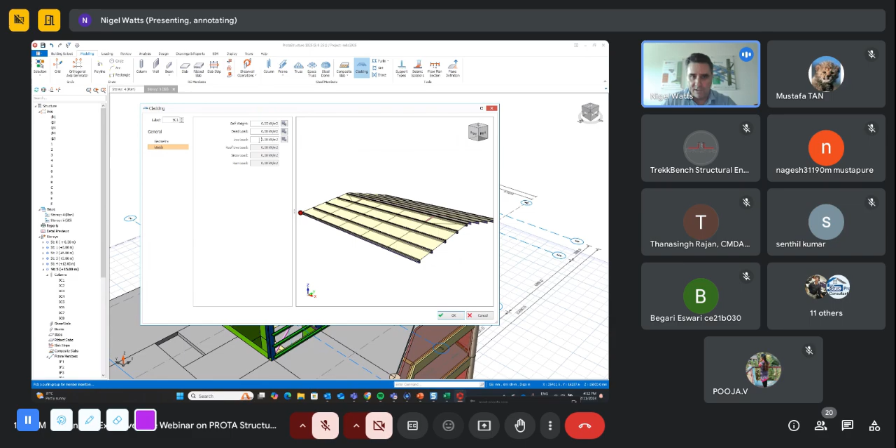All the concrete structures are set out as if you were going to build it. In addition to this, we can automate the way we assign loads. Things like cladding loads can be set up here. So if I want to put the self-weight of the cladding as a pressure, and also define some live loading to the roof, you can come in here and define that, and it's automatically set up in the model. This gives you an idea of how you could go about establishing a quick model. I've tried to make it simple and flexible and show you some of the different features in here.

Once we've done this, we can move into setting up the loading, and then finally designing the structure. The first step would be to assign the seismic loads. We talked earlier about being able to step through the code here, so in here you'll have the maps that you can choose from for India, and you'll be able to set this up to IS 1893.

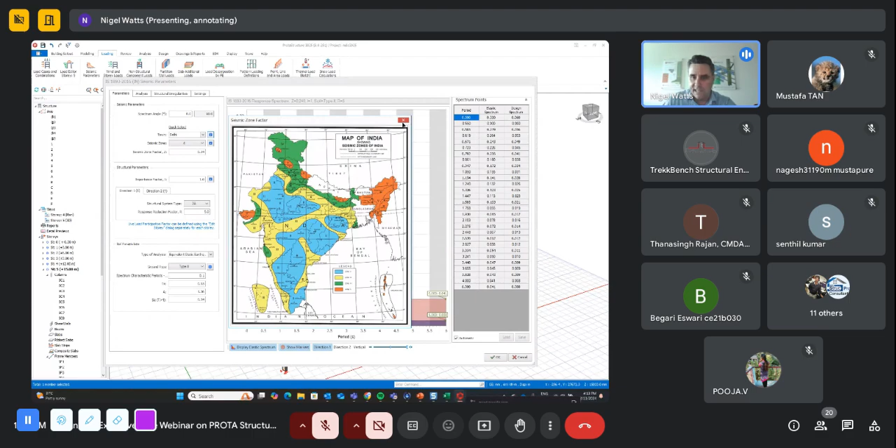You can choose the seismic zone. If you're not sure, you can just come in and choose wherever you are in India, so all the different towns nearby are there. Maybe we can assume this is in Delhi, and the seismic zone is 4.

You can choose your different structural systems in different directions, and this will affect the design and detailing. So I may want to use a structural system 4C in one direction. These are orthogonal directions, so you can have different structural systems resisting loading in different directions. You can choose this, and you'll see the curves adapt to suit the ductility demand. This will also affect the design and the detailing. If you wish to key in your own values here, you can.

You can also select from different ground types based on the code. If it was a stiffer soil, you'll notice the curve will adapt, or maybe it's medium stiff soil. If you've done a site-specific study, you can fill in your own parameters here as well. For the analysis, we'll key in the number of modes we wish to run. You can also run vertical seismic, if that's a consideration, and damping and so on can be fed in here.

We'll also automatically check, as Mustafa mentioned earlier, for irregularities, both in plan and in elevation. So if you have significant differences in stiffness and mass, or significant torsional irregularities, these are the kinds of things we automatically check, and we adapt the analysis results, applying the penalties as needed. We'll also automate strong column, weak beam checks and joint shear checks. You also have the ability to scale up the response spectral results to match the equivalent static base shear, if that's what you wish to do. So there are all sorts of checks we're doing as part of the seismic design process here.

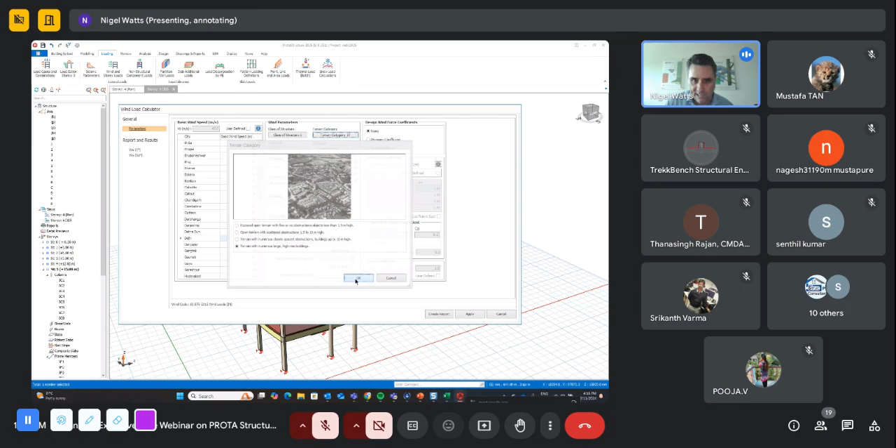Now, similarly, we can assign the wind loadings. Mustafa also talked about how we've implemented a comprehensive wind load generator in here, and you can choose wherever you are — so again, we're in Delhi. You can choose the class of structure, what type of building it is, just stepping through the code here. The terrain category, maybe it's a fairly built-up area that you want to have. You type these in, and the factors will adjust accordingly. Of course, you can key your own factors in here as well. You can also look at a pressure coefficient.

If you want to look at internal and external pressure coefficients, these can also be defined. You can set these up, and various permutations can be automatically generated here. Once you've done that, we'll automatically calculate the pressures and calculate the forces that need to be assigned to the structure.

I can just apply those, and they'll be set up on the model here. If I just hit OK, then that's been set up and done.

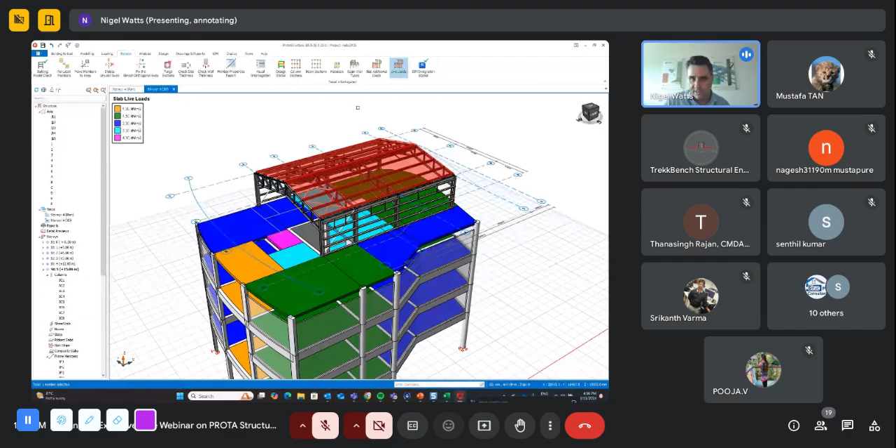Now, before we get into the analysis and design, we can check the model. This includes things like being able to check the live loading. It's all color coded, so you can quickly check to make sure that what you've set up is easy to understand. Superimposed dead loads, material grades, column section sizes—it's all color coded, so it's easy for you to review the project before you get into the design.

The analysis is a button, and I'm going to step through this process now. So I'm going to set up the building analysis model. Before I do that, I can edit things like grades of concrete and steel. If I wanted to design a higher grade of concrete into the structure, I could do that.

You can manipulate this member by member, but you can also generally adapt this to suit. You can do the same thing with the rebar—if you have preferences for the size of bars you wish to use, you can customize this to suit as well. So all of this is customizable, and you can set it up to suit the project you're working on.

Now, I'm going to use rigid zones in this project. I can also design the beams as flanged or rectangular. If you have foundations, these can be merged with the superstructure, and you can look at soil structure interaction. I'm going to mesh the walls.

I can also choose to selectively mesh parts of the structure. So I want to create a flat slab at the 4th floor there. I'm going to mesh that, and that will now be meshed in the building analysis—you can see that's been activated there.

Now the analysis is just a button, and I'm going to run this now. What we're doing is taking this physical model that we've created and automating the analysis and design of it. So this is a batch process.

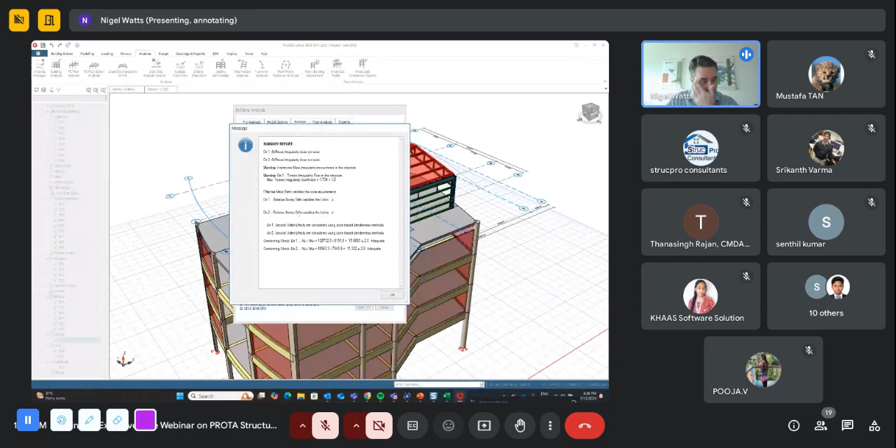Okay, so that just took a couple of minutes. Post-analysis, there are various reports that we generate, and Mustafa touched on those before, so I won't dive into that. But what I will do is just take you into the analytical model.

So post-analysis, you can see the analysis results here. You can look at the model if you want to see things like axial load, and you can see the various combinations as well as load cases here, so you can choose a permutation that you wish to look at.

You can see that this is adapting, you can see how the load's changing as you go down the column. You can look at things like your shear forces, and you can see your moments. You'll notice that we're taking the moments at the face, rather than center line.

So for more efficient design, we're taking the moment at the soffit of the beam and the column, at the face of the column here. We're taking advantage of rigid zones to give us more efficient design.

So you can come and interrogate the model, have a look at these in more detail. If you want to look at a particular member in more detail, you can look at this more closely, and you can see the results here for every single load combination and load case.

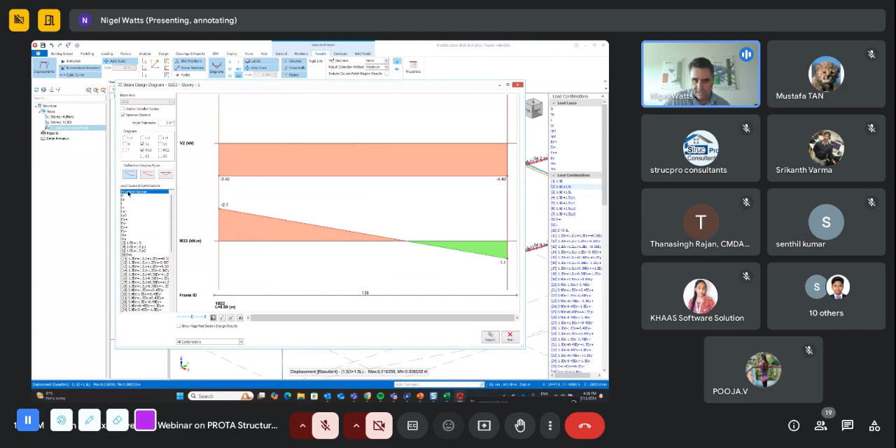You can also see the envelope that we may be using for design. All of this is shown to you here, and you can interrogate the model.

So if I wanted to know what the displacement is along the member from my serviceability dead plus live case, I can easily come and see that. You can just interrogate this if you'd like to see if there's any torsion in the member, and those results can be provided to you as well. It's an easy way to interrogate the model and make sure you're comfortable with the results. You can look at other things in here, of course.

So if I'd like to see how the structure is behaving under, for example, seismic loading, I could just get a feel for the behavior of the building there, maybe in the X or in the Y direction. We can look at that behavior.

If you'd like to see the dynamics and see how it's being excited under seismic loading, you can come and have a look at these, and you can see different modal shapes here, and look at higher modes as well. I can keep going up and looking at all the different permutations for the building there.

If you also wanted to, I'll just turn those off for a second, but you may also want to have a look at the stresses in, for example, the slab. So we also have, you can review the contours, and you can see the contours in the walls there. You can turn them on and off.

So if I didn't want to see the shear walls and was more interested in the slab, maybe I want to know what the shear stresses are in the slab, or perhaps I'd like to know what the local bending stresses are, top and bottom. This will take account of Wood-Armer effects as well. You can also see the area of steel contours here, and get a feel for what kind of steel requirements might be at this stage.

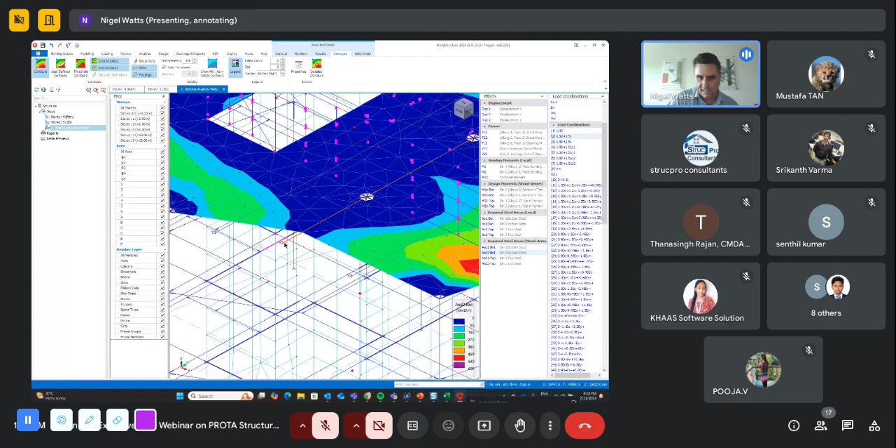We've also integrated along the strips there, so you can see strip results, and you can view these as well, and see the moment diagrams and so on for those strips that we cut earlier for the slabs.

So if you're happy with this, we can then come in and interrogate the design. We've got the model here, and if you just want to quickly check it, you can see the design status. You can see that the majority of the members there have passed, but there's one or two members that haven't quite passed. This is all color coded, and you can come in and interrogate that.

So if you wanted to just look at this beam in more detail, let's have a look at why. We can see the section design here.

Okay, this is iterated, so you can see it's got very, very close. In fact, you could probably argue that that's passed. Okay, it's right on the limit.

You can come in and manually adjust here, but what you can see is that we've automatically selected all the rebar. You can see the diagrams that we would use for the design. I'll come out of this beam.

I won't look at this one in particular. Let's choose a continuous member, so something like this. Okay, we can see the design.

You can see that we've automatically selected the rebars here. You can look at the diagram, so you can see the envelope that we're using for design along that member. You can also see very detailed calculations if you wish.

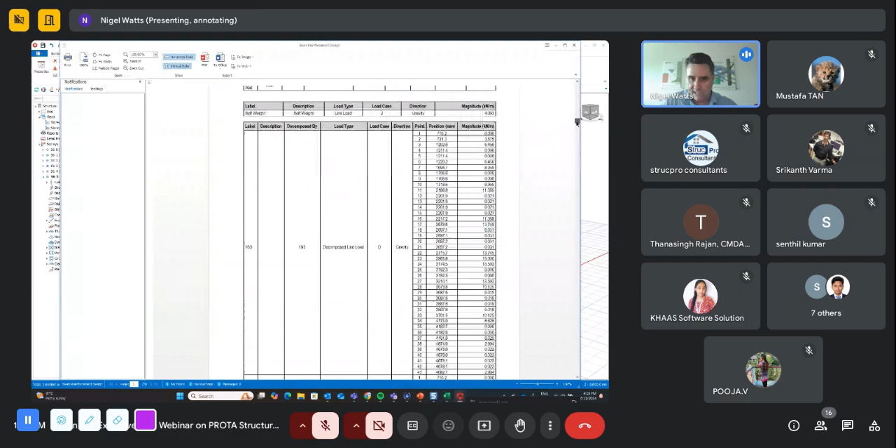Earlier we were talking about documentation being very important with ProtaStructure, and what we're doing here is creating all this documentation. You can see detailed calculations in here. All the detail you'd ever need to satisfy the design is being provided, with step-by-step calculations with reference to the code.

You can look at particular parts of it. Maybe you're interested in the deflection checks that we're doing, or maybe you're interested in the underlying seismic checks that we're performing for capacity shear. All of these are clearly documented, so you can see exactly how we've come out with the design results.

These calculations can be PDF'd or sent to Word, but they will fall into the report manager, which we can compile at the end.

Now, if you just want a little preview, this is just a teaser of what the detailing might look like. You can get an idea of what we might end up producing before you actually go and create and send those out to ProtaDetails.

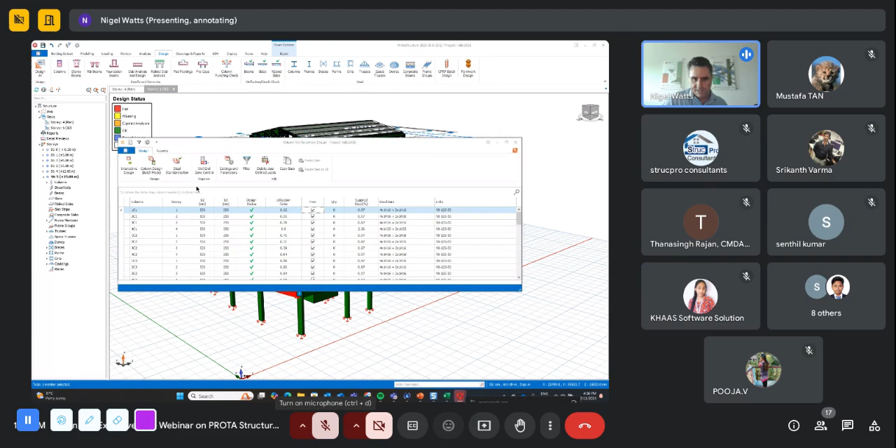Now, the design results are also collected, so you can see the design results. If I want to look at all the columns, all these have been designed. I can click on a particular column, look at the design in more detail, and see which case is critical.

So this is the critical combination that's governing the design. We will work out the exact location of the neutral axis to work out capacities, and you can see your interaction diagrams here with the capacity plots. This is all being done to the code.

And again, you can also see detailed reports. So if I just create the report, you'll see that you've got detailed calculations in here, and this also includes all the capacity shear checks that we're doing to the appropriate clauses in the code.

Now, underneath this, there are also joint shear checks that we're performing. So if you click on it, strong column weak checks can be created. Again, these can be documented, and you can see the various checks there.

I think I need to probably run that for a beam rather than a column. Similarly, with the story beams, again, we can see the design here.

I think I've got one other member that I need to just quickly update, so we could just change the rebar. I think that was the same as the earlier one, so let's just get this right. Okay, so we can see the design there. We might be satisfied with that.

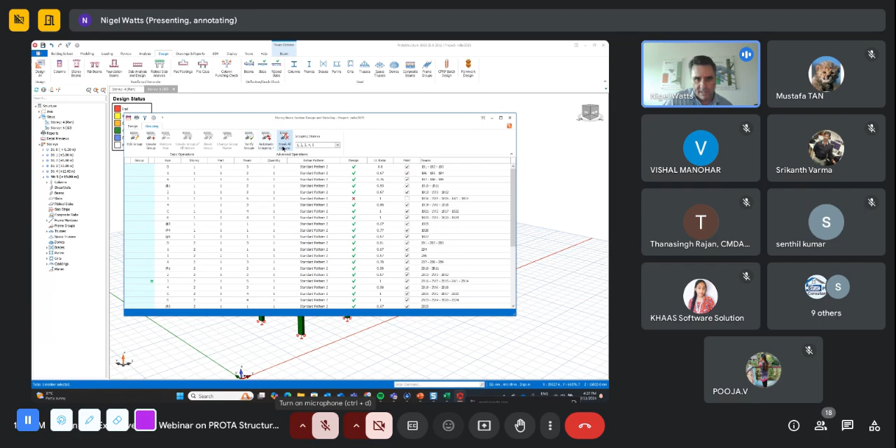What you can also do is group members, so you can group all similar axes, and it will rationalize the design. So instead of me getting hundreds of beam details, it will rationalize this, and you'll just get a grouped arrangement of bars there. Okay, I'm happy with that.

Similarly, you can look at the steel design and interrogate this. You can select the elements, or dive in and look at the detail here, and see the detailed checks.

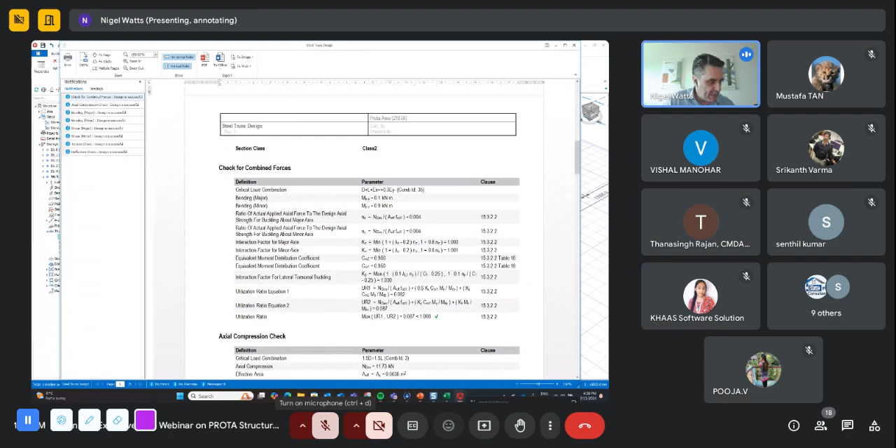And there are also detailed reports that you can review, and again, all the clauses, code clause referencing and so on is being provided here. So all of this is being documented. It's very clear and easy to understand how we've come up with the design, and you can just come in and view this.

Now, I'm going to move down to a different level, down to the foundations. If I come and select these columns on the edge, I'll just choose a few, something like those. And if I right click, I can now come in and put in a pad base or maybe pile caps. So let's just put in some pile caps.

Let's create these, and you can see pile caps design. You can set up the allowable working loads and so on, but I'm just going to come and batch design these, so all the pile caps are designed.

Again, I can group these so it will find those that are similar, and it'll rationalize the design here. If I hit OK, you can see just with a click we've been able to come in and design the pile caps.

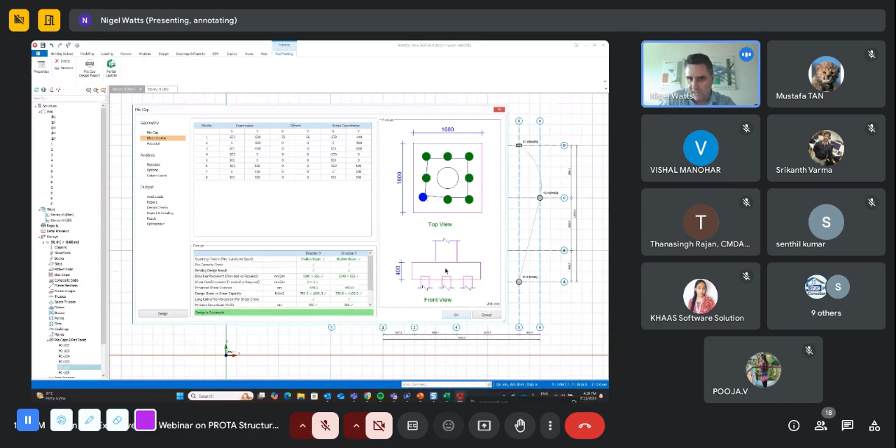Now each pile cap has got flexibility, so you can come and work with the piles. If you find on site piles move and you want to check for eccentricities, you can key in the exact location of the pile and we will check the as-builts. You can customize this and actually get the actual as-built locations of all of these.

Similarly with the pad bases, if you just come and select these other columns here, let me just choose this one. If I right click, I can insert a pad footing, and these can also be automatically designed. So we can just design all of these - they'll be designed in a batch process and they're done.

Now if you have other foundation systems, for example, I may want to put in a raft - maybe I've got a raft beneath the core wall there. We can define the raft, key in the thickness, and assign that in here.

Now if this raft didn't work for some reason, maybe you find the bearing pressures are too high, you could insert piles beneath this as well. So you can have piled rafts, and you can play with various arrangements, arrange them accordingly, delete and remove piles. It's up to you, but we support a range of different foundation systems in here.

And here you can visualize all of this as well, so you can see exactly what we've been up to.

The final thing I might just want to have a quick look at is go back up to the 4th level and see if we can just look at the design of the slabs. Let me just design - okay, I've probably got to play with this a little bit, I'll come back to it.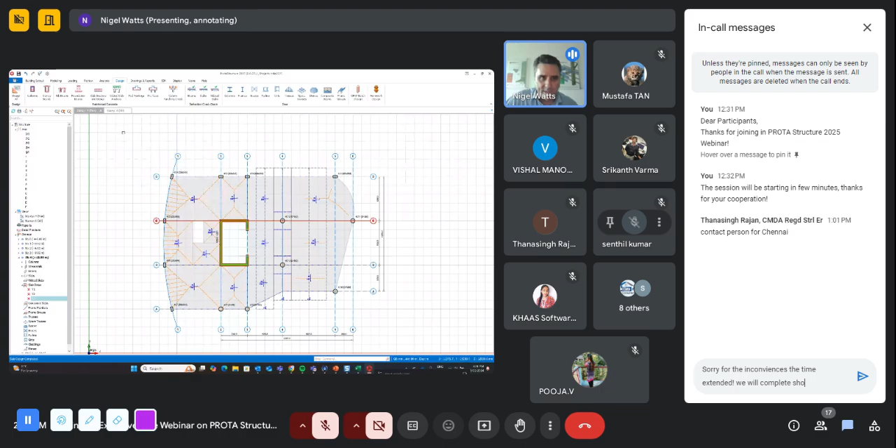So I've got my building, and maybe at this point I'm largely complete with the design. Now at this stage I want to start to document, so I want to come and take all of this and create all of our drawings. I'm going to come out to...

ProtaDetails, and we're now going to start to produce. So we've done our design, we're happy with everything, we now want to start to document out the project. I've completed a little model here, and at this point I'm going to launch ProtaDetails.

As Mustafa mentioned earlier, ProtaDetails is a complete CAD system, and this allows you to fully automate the documentation of the model. Now to do this, we can just ask it to auto-generate - I click on this and I can see all the different elements that we want to draw.

I'm going to insert this into a sheet, and this would be your standard title block. You can come in and input your standard title block, label them however you want, put in the scale of the details, and various details in here you can manipulate - if you want to change the way beams are truncated within the drawings, all this can be done.

Once you're happy with this, you can just ask it to draw. So what it's going to do now is take all that design information that we've done and automatically come in and create the documentation for us.

So you might just see that it's put in a little sheet outline, and we're now going to go through very quickly and it's going to start to document things for us. Just give it a few more seconds and you'll see this come to life. This is really where the magic happens in the software - this is where we really start to save you significant amounts of time with documentation.

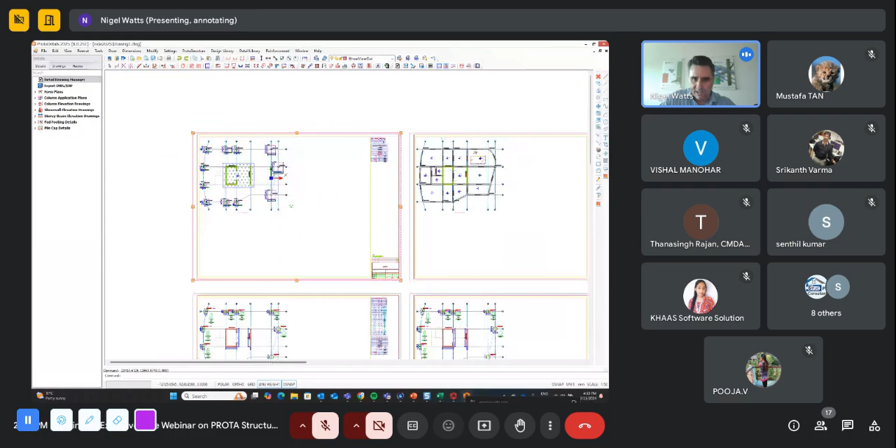It's just finished - you can see there that here we've got our foundation drawing. But if I just come out, you can see that just within a click we've created all these drawings, all automated, all within a click. You can come in here, you can see our foundation drawings, and you can look at your key plans.

Okay, you can see this would be your title block. Everything's laid out into this. You can also see set out drawings against grid if this is what you would like to show. You can see the detailing in the core walls there.

Okay, you can see our elevations of drawings, so you can see elevations of our shear walls. You can also see the column design. You can see all the ductile detailing being employed as part of that as well.

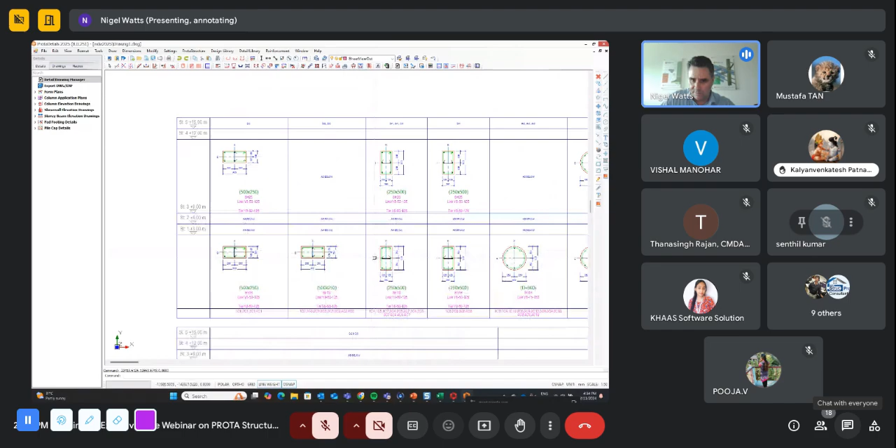If I come over to the beams, you can also produce things in schedules. So column schedules will be created. We'll automatically group similar elements, so you can see these are all grouped. It understands what's similar, and we'll rationalize this for you as part of the detailing process.

You can see the shear walls there and all the detailing around the end zones. You can also see the beams here, and you can see that we are detailing all of this out. It knows what's similar. All the plastic hinge zones and so on will be appropriately detailed, and even when you've got secondary beams coming in, additional links and so on will be provided for those, to collect them. So all the details here will be produced.

Now, if a member gets, maybe there's an example just here, a member's got a little bit too long for the sheet, it's truncated there and it's carried on above. So you can see it'll just continue. It'll try and optimize the placement of the beams within the drawing sheets for you.

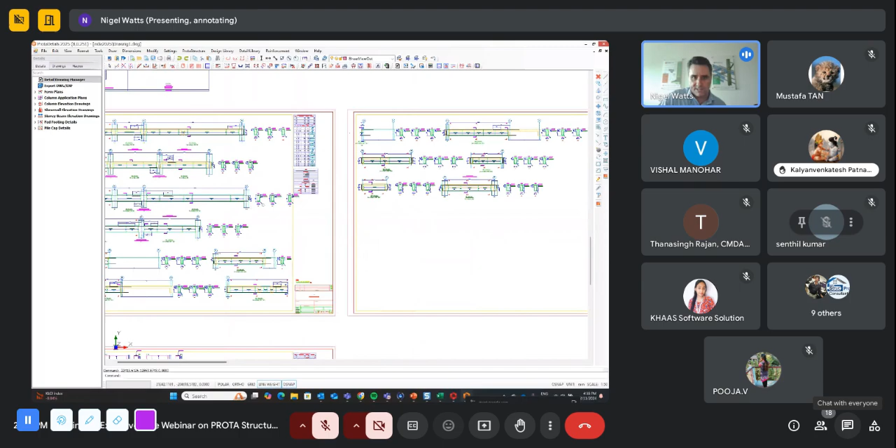You are in CAD, so if you'd like to move any of these around, you can just come in and reposition them to suit. If you want to make other changes in here, you can do this. So if I decided, for example, that I wanted to cut this member and reposition this below, all of this you can do. It's repeated the label, it knows the link spacing. There's intelligent drafting in here to allow you to manipulate the details to suit what you want to show.

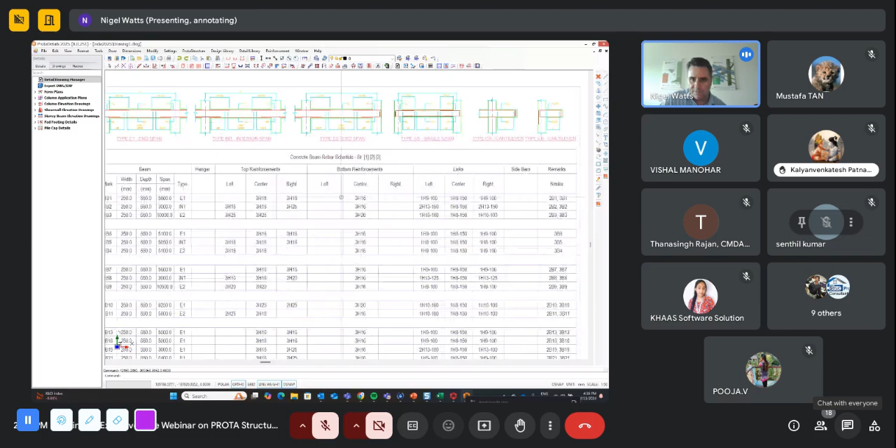You can also show things in schedules. So if you just want to simplify the process and don't want to provide all the level of detailing, you can show things in tabular schedule forms here as well.

And this goes right down to the foundation. So you can see your pad footings here. You can also see your pile caps. Everything that we create here is being detailed out into the drawings.

Now, obviously we can see all these drawings complete in this manner. You can create new sheets, and you can choose to selectively draw up what you'd like to see. So if I just wanted to draw up, for example, a shear wall up the entire building, I can just come and choose to draw this out.

So that was the wall that we created earlier with the openings in it. So I can draw the whole elevation if I wish. You could also just grab a particular beam and draw that out if you like.

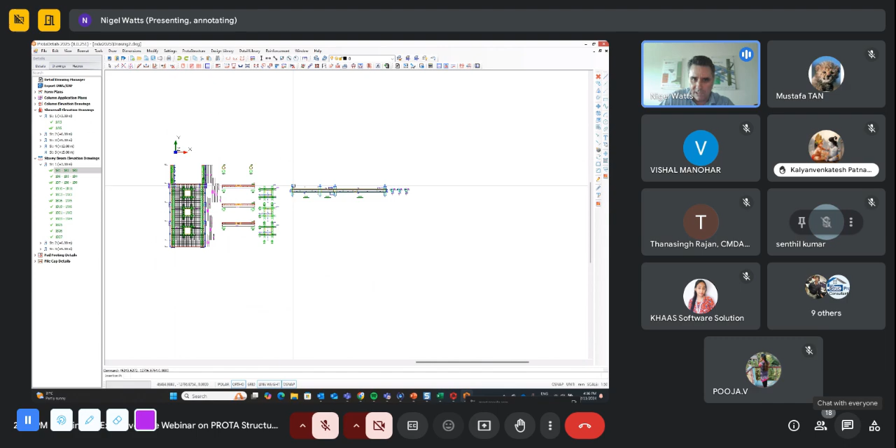You also have the ability to be able to create your own details in here. As I was mentioning, it is a complete CAD system, and if you want to create additional details, you can do that. We have rebar libraries in here that you can take advantage of, and you can come in and draw out and place rebar into various elements that you might want to create, like I've done here.

Now, if this was maybe a variation on a job, you can select all of this, and you can actually just instantly quantify this. It will take all the rebar there and instantly create a full schedule. You can see that there's 2.87 tons of steel there. That includes everything - all the laps, the links, including that little detail that we just created.

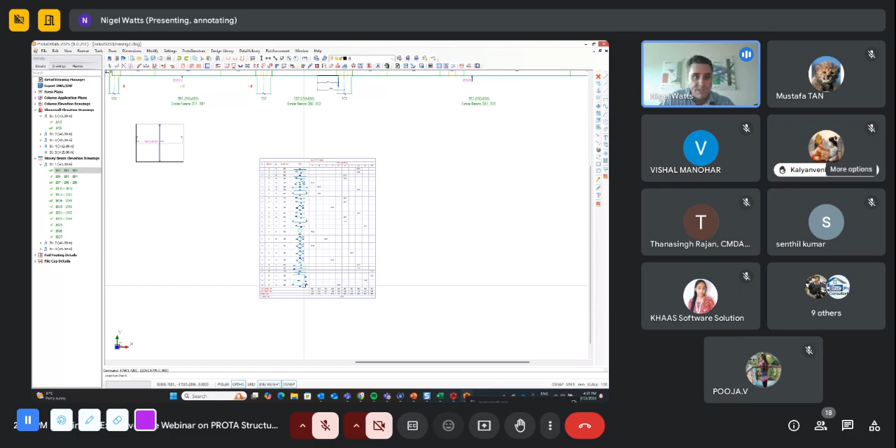So if you're wanting to compare different schemes, quickly evaluate different schemes on projects, you can. Any of these tables that we create, you are able to export these out to Excel. You'll see all the bar bending schedules being created there as well. If you wanted to, in here, maybe put in costs and so on, you can - it's very easy to create and work in here. This is a full CAD environment, but you also have the ability to cost everything out, providing that additional level of insight.

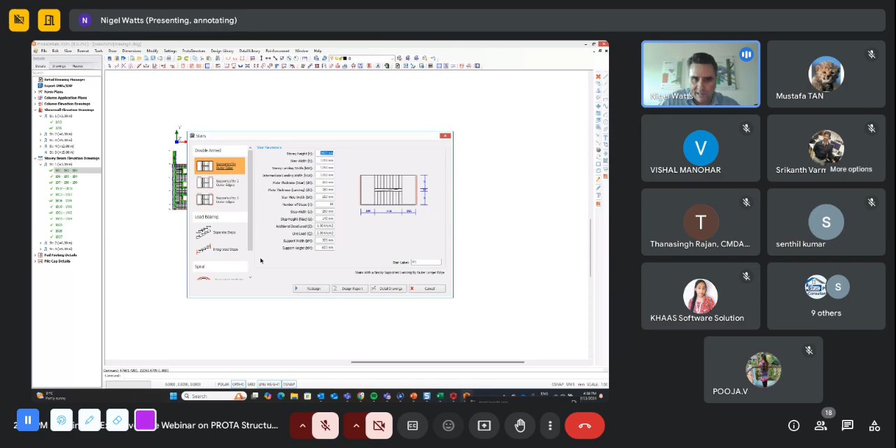Now, we do have libraries here of other component designs that you may want to take advantage of, as well as a detailing library. I won't go into this in too much detail, but if you wanted to, for example, quickly design a staircase, you can key in the parameters here and design it.

Okay, we will create the design report for it, so we'll do the various checks to the code, and it will document these.

But the key thing is that we are then creating the drawings. These are design detail components, and the library's growing all the time. We've got retaining walls, scaffolding, corbels, swimming pools and pile design. So there's a range of different design macros you can take advantage of here. But the key thing is that we automate the drafting, we lay it all into your sheets, we arrange and create all the drawings for you here.

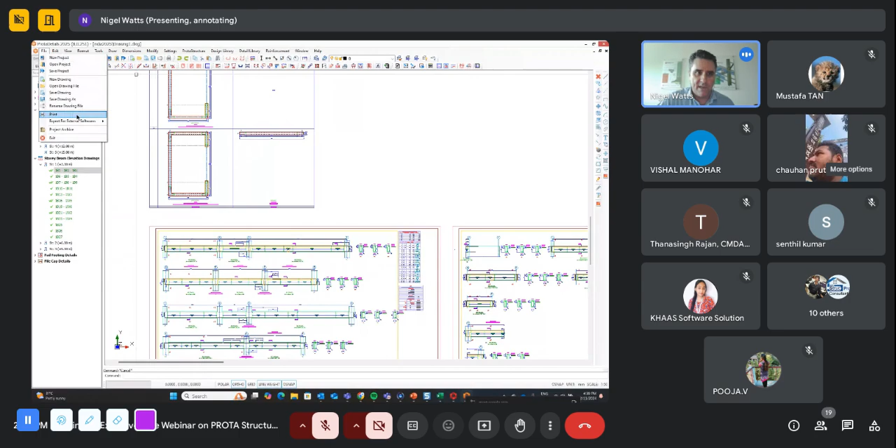Everything's being set up in CAD. It's a DWG format, so any of these drawings you're able to send out. You can manipulate them in here, do extra drafting, but if you'd like to at any point just send this out to CAD, then you can do that.

So I guess the final thing I'm going to touch on, and then I think we've probably had enough, is that there are reports. At the end of the job, we have a report manager. All the design documentation that we've done during the course of creating this project will be saved away into the report manager.

And then we can take the reports that we've created and add them into one document. I can just add all available. You can see all the reports here, and we can then combine these into one report, which you can then use for submission.

This can be customized. You can put your company logo in here, make it look exactly like your calculation pad, and we will just bring all this together into one document. You can add other information, maybe site photographs, or maybe a design brief that you'd like to incorporate in here as well.

All this can be combined into one. Just give it a second. It's not just bringing those elements together, but in a smart way it's also creating all the table of contents as well.

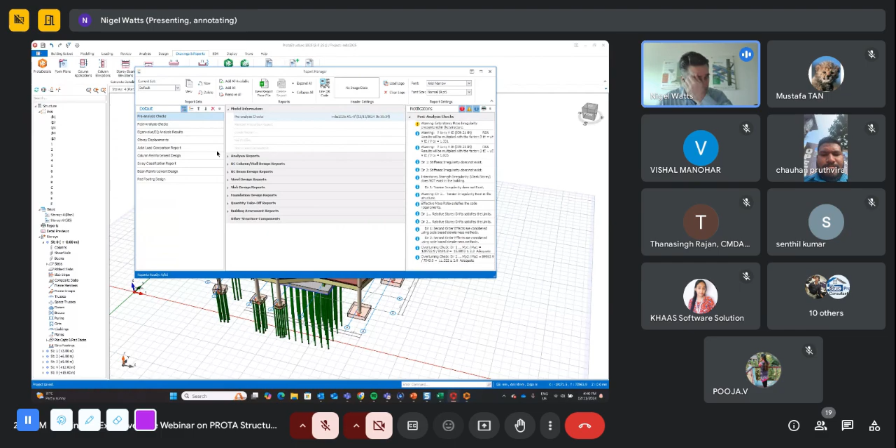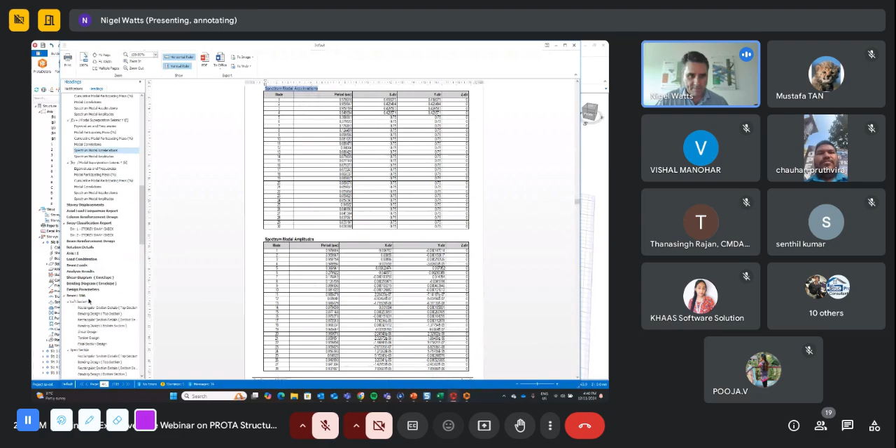Give it a second and it should spring to life, and then we'll be able to see it. So you can see all the table of contents has been automatically created here, and you can flick through and look at different aspects of the report - all the seismic checks, various detailed checks, the beam design calculations. So these can all be compiled into just one document.

You can PDF this or send it to Word. As I mentioned, this can be customized with your logo, to look exactly like your company calculations. So that gives you an idea. I know I cannot do justice to the system in the short amount of time we have today, but I hope I've given you some insight into the platform.

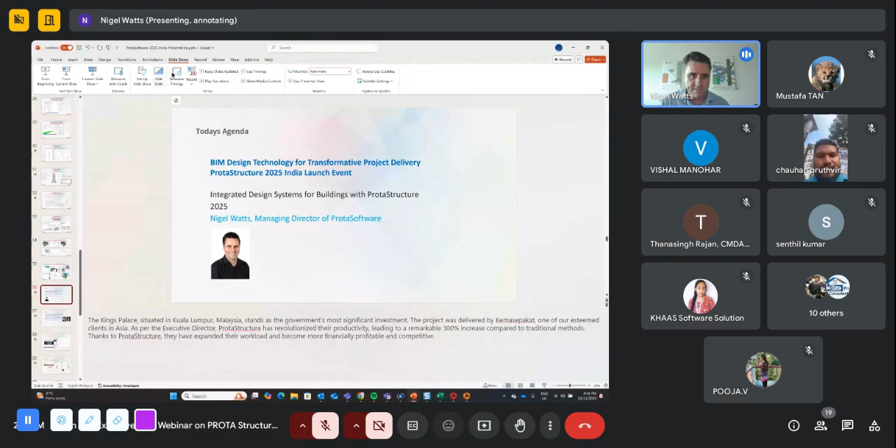And I hope you enjoyed that. I'm just going to finish with a few quick slides.